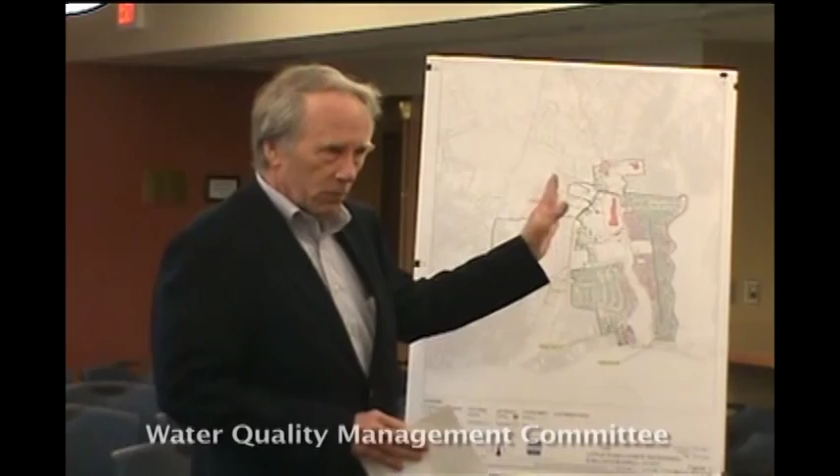Okay? It's not about the exact boundaries of an area to be sewered. The consultant's going to show you maps. The maps are a work in progress. Where the exact boundaries are is not a finished thing. So you can't look at this map and say, my house is in, my house is out. We don't know yet.

Third piece, it's not about effluent disposal sites. The septic is going to go to the plant in West Falmouth. That's a given. Where it goes after that is not a given. It's still a discussion matter. It's not a discussion matter for today.

Fourth, which I know is going to be in everybody's mind, who's paying for this and how much are they going to pay? That's not on the table today because we don't know. We don't have an idea. You're talking about a system that hasn't been designed. There's a whole bunch of pieces here that have to be settled before you can answer any of those questions.

If there's going to be betterments, how much they'd be, nobody can know until you know how much it costs and until the town makes decisions about where it's going to get the money, whether it's going to get a 0 interest loan or a 2% loan. These make huge differences to the cost of this thing. Nobody knows, so we can't talk about it at this point.

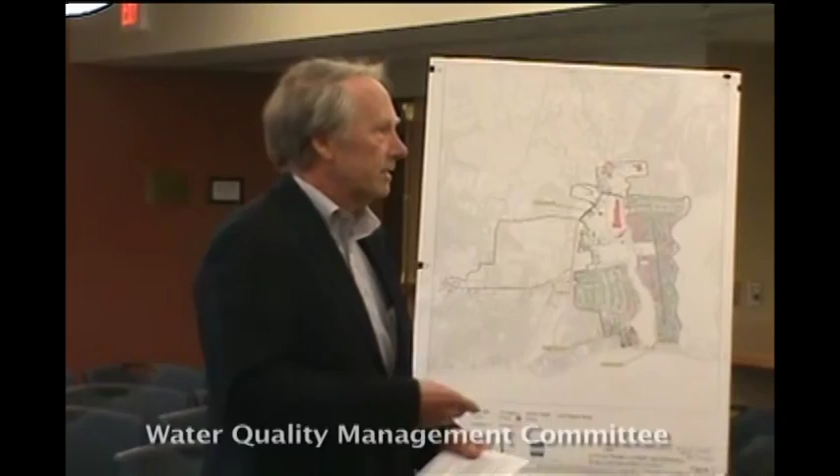What this meeting is about is this. The sewer world is a lot different than it was 30 years ago. Back then, the big pipes, 12 feet down in the ground, was the only option that anybody really considered. That's not the case anymore. There's other options, which we're going to talk about today, which are cheaper in many cases, less intrusive. I mean, they all have pluses and minuses. It is not all about big pipes anymore. We're here to explore all those options, and particularly how they would affect people who live in these neighborhoods.

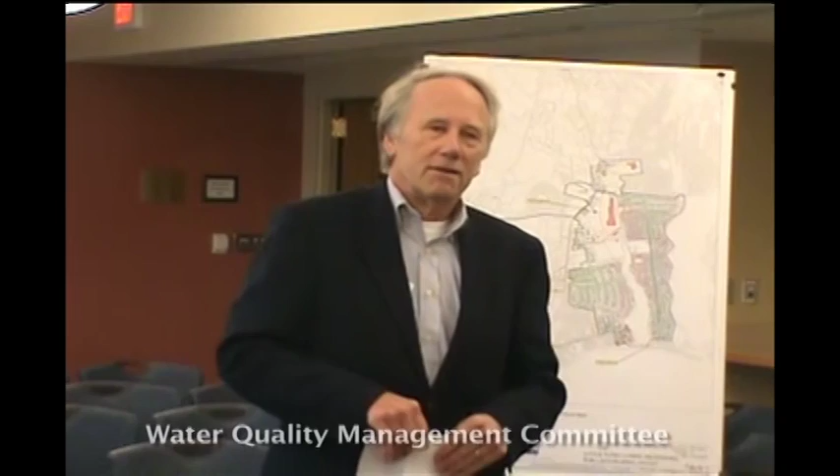So we've invited people from the Teaticket Association, from the Heights Maravista Association, Finance Committee. Judy's lived in the Heights all her life, and she's been on the Finance Committee or the staff of the Finance Committee almost all of her life.

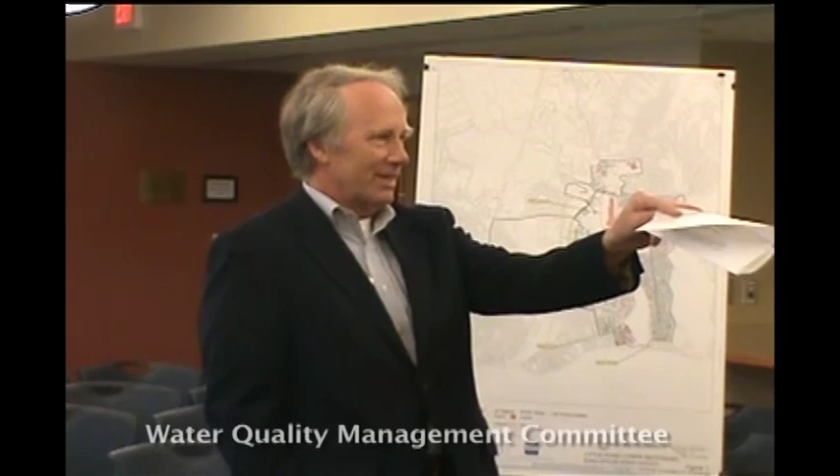You know, we got this guy who spent the last 3 years immersed in sewage, and he's back for more. These folks have lived in the Heights all their lives. You've lived there. We wanted to make sure you were here to get the picture, to think about it, and to give us your input. Because, you know, you're going to have to know about it. You're going to have to live with whatever the town ends up doing.

So the purpose is to explore these options today. No decisions are being made today. The consultant is here to tell you where their thinking has gone, to tell you what the options are, and to get your input. That's what it's all about. And you should introduce the consultant. Jeff, from GHD. They changed their name, I can't use it.

Good morning, everyone. My name is Jeff Gregg. I'm from GHD Inc., formerly Stearns & Wheler, for those that know both. What I'm going to do today is talk to you a little bit about the different technologies that we've been asked to look at for collection systems. I've got a handout, and I'll walk through the basics of the different types of collection systems, and then talk about what our task is for these various areas and some of the progress we've made to date.

As Eric indicated, we aren't finished. There are no decisions that have been made yet. We haven't done any of the costing or any of those things. It's really to use this forum to help educate the group, answer questions, and receive feedback on the various different technologies. And if there are questions that I can't answer today, I'll certainly have them documented, and we can work on trying to get back on those questions to see if we can address them. So what I wanted to do is start off.

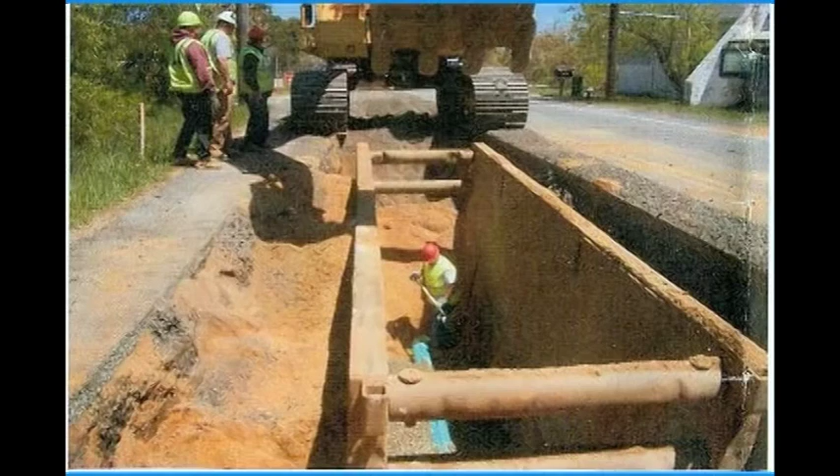Every town is different. Towns will have paving plans, and this applies to most of the technologies. If a town has a paving plan, they may just do a trench repair and come back to resurface the road afterwards. It all comes down to how they want to do it and what other projects they're doing.

Some towns elect to do water work at the same time, or there's underground utility work happening, like the gas company—in case you drive anywhere on the Cape, this past year the gas company was everywhere doing improvements. So a lot of times towns will try to piggyback that. It's very disruptive; all construction can be disruptive, but there are ways to work around it: communication, traffic management, informing the public so people know what to expect.

These pictures are very useful to look at the scale of how deep this pipe is. The pipe is blue down at the bottom, and you see a man well below ground level, and this large metal object around him is called a box. To do all the excavating, it has to be done within a box—you dig, then move the box, then dig, and so on. So it's slow and deep if the system is entirely by gravity.

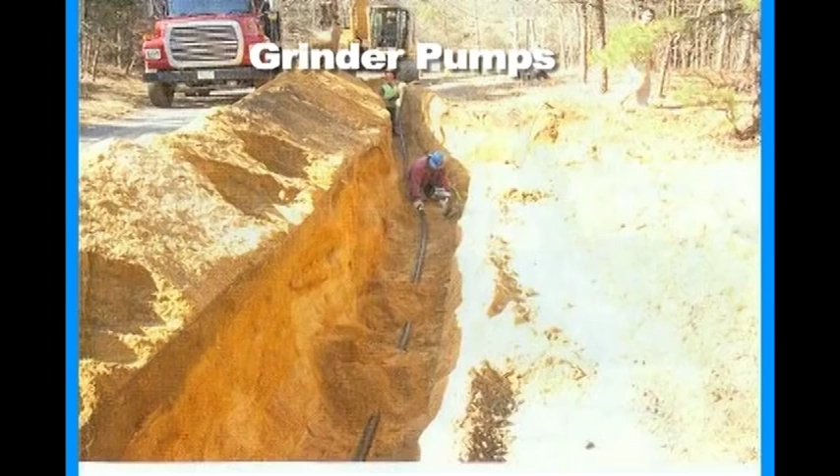To give you an idea, the picture below shows a typical trench. In this case it's high-density polyethylene pipe, kind of flexible, though you can also use PVC, which looks like a miniature version of gravity sewer pipe—just with thicker walls so it can handle pressure. Here it's fused together using a tool that heats up the pipes so they basically butt weld together.

This trench is about 4 feet deep, so they have about 4 feet of cover. Some towns may require it deeper. If you're in colder climates, there's a concern about freezing, so you typically want to get it below frost depth.

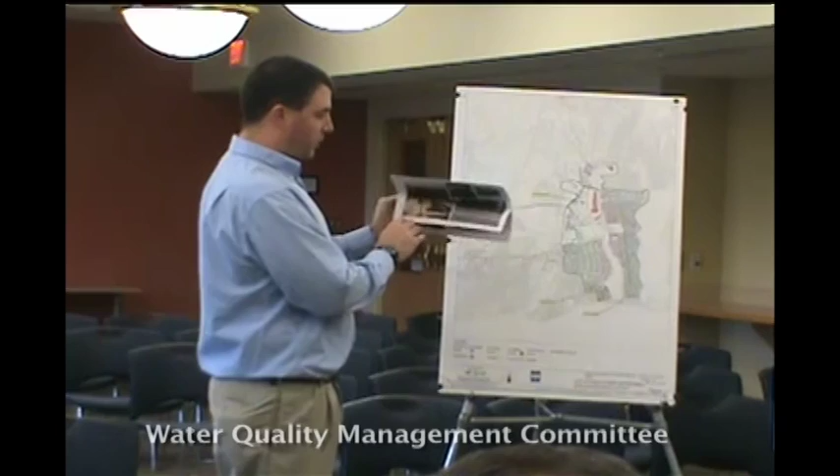As Virginia pointed out, in the gravity example you had a trench box. If your excavation exceeds 4.5 feet, you're going to have a trench box regardless of the pipe size—whether the pipe is this big or this big, if you're past that OSHA threshold, they'll have to put a box in, which makes your trench wider. It doesn't have to be as big a box since it's not as big a pipe, but it's still going to have a structure.

So there's safety considerations for that as well.

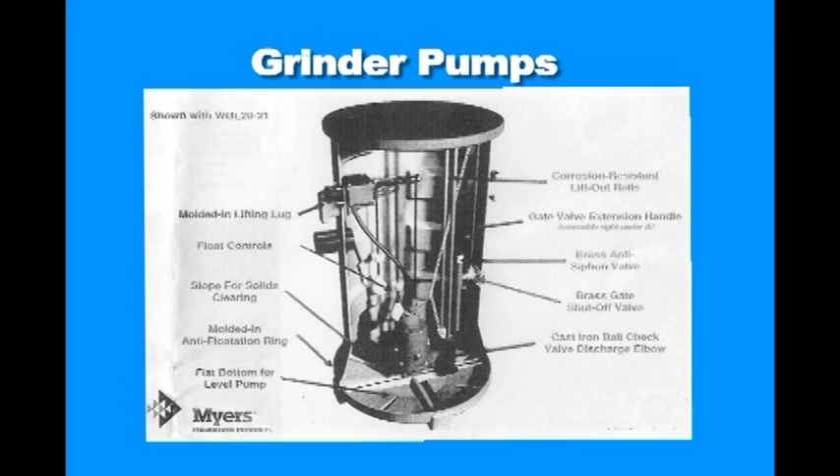There are others. The Myers is more like it's a slightly larger structure, so the cover is slightly larger, probably closer to 2.5 to 3 feet in diameter. But basically, a pump sits on the bottom of that structure. Your flow flows by gravity from your house, as it would to your septic system, but it would go to this structure, and then it would be pumped out to a small diameter.

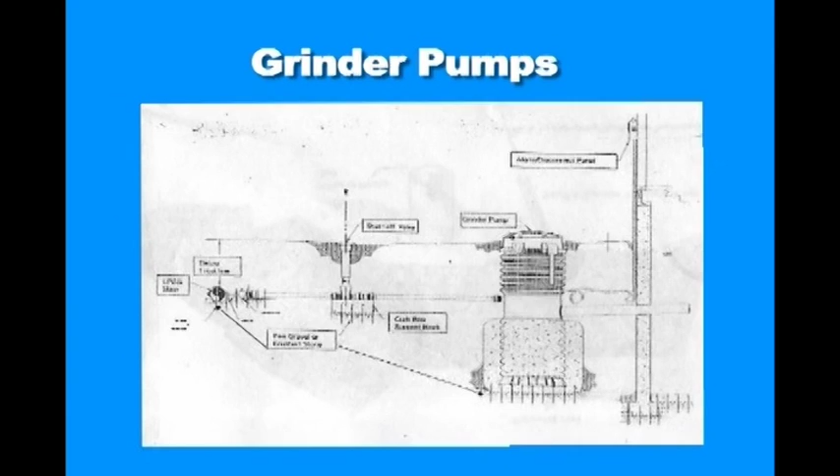To give you an example, the diagram in the lower right-hand corner shows how flow comes from your house into, this is the E-One example, a high-density polyethylene structure, and then it pumps it out, and you have a curb stop at the property line, and then it ties into the small diameter main. The small diameter main in the road is typically between 1.5 to 4 inches.

And if you had to pump further, then you have to get a larger main because you have to deal with head losses and velocities. These types of systems can either pump into their own system and eventually end up dumping into a gravity collection system, go directly to a pumping station, or go directly to the treatment plant. In this case, because the treatment plant is so far away, it's very unlikely that we'll look at that alternative. It will likely end up going to some of the existing collection system or other pumping stations proposed or existing to ultimately end up at the treatment plant.

The ones that we've had in Woods Hole have probably been there for 10 years, and as far as I know, they've been fairly trouble-free.

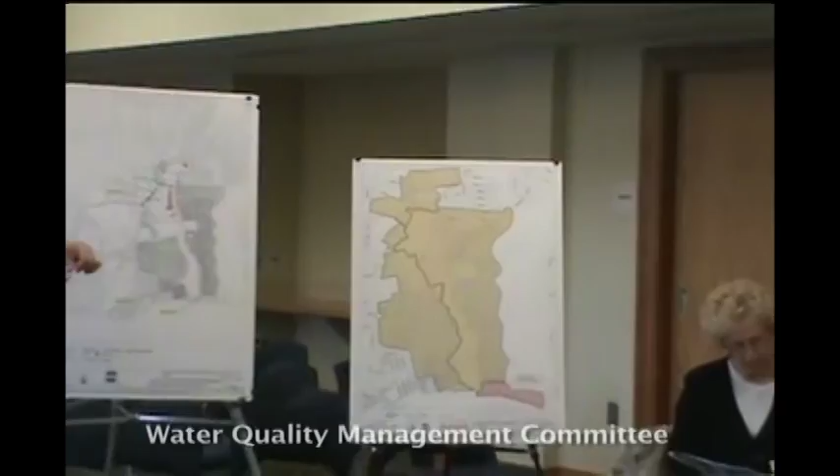So now this grinder pump system eliminates the need for the traditional septic. It doesn't work with it, it replaces it, correct? You can do two things. It typically replaces it. In the case of most people's septic systems, they've been in the ground for over 20 years, and the integrity of the tank is questionable, so depending on the age of the system, it's easier to go in and install this.

The E-Ones, they literally come in with a little thing that looks like a bobcat, basically with a big auger on the back of it, and they just auger it down, and they plop it in.

If it needs some kind of balance because you're in groundwater, or you think that you have the potential for groundwater coming up, they'll put a concrete footing around it to hold it in place, and then that would replace your septic tank, and then it would go out.

They do make these types of systems that can either go in your house, or into your septic system. Like if you had a brand new septic tank and it was easy to kind of go in for that piping, you could have that unit installed. They typically don't like to do that as much, because it may be more expensive since it's more of a specialty setup for them. You have to deal with making sure that you have it set up so that you can get the rails in, and you actually have to go into the structure to make sure that your pipe's coming out through that septic tank, through your effluent discharge location.

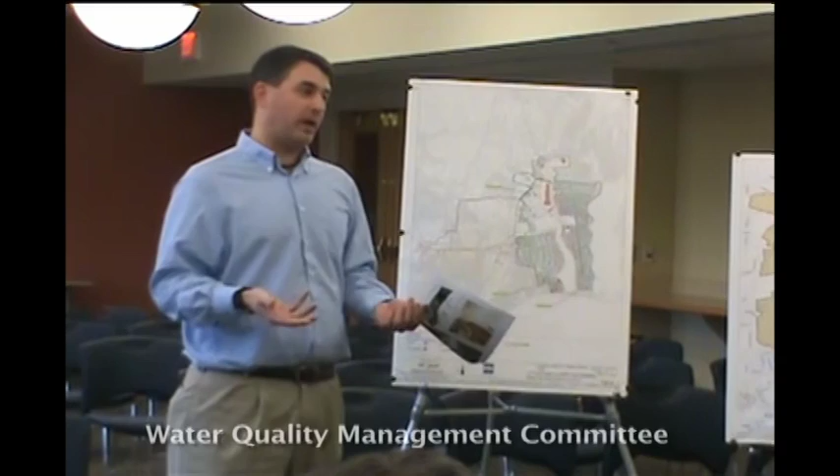What you could possibly do is, you may not be able to run the pumps, but you may be able to deal with the alarm panel, meaning so that you know, granted if you're in a hurricane you don't have any power, but at least you'll get an idea - better stop flushing the toilet right now, and call the DPW to see if they can come hook up the gen set and pump us out. I'm not sure if the Vineyard did it, but I think I know these two manufacturers, at least one of them, probably both.

You can get slightly larger tanks. There's a point where you might say the bigger the better, but it's not always the best. So that might be a decision later on, what size we standardize.

We asked both of these towns in the Vineyard, which have had them in place for, one has had them for 10 years, one's had them for maybe 7 or so. We asked them about frequency of repair - how many times did the town get called out to fix something in one of these? And in both cases, it was like once a year.

And it was usually because some kid had put a G.I. Joe down the toilet, or something major had gotten into the works that had made it need repair. But the number of repair calls were very, very low, considering they had hundreds of these installations that had been in place for quite a few years.

So that was reassuring, comforting, yeah.

As technology is advancing and you can access pretty much anything on your smartphone, they have relatively inexpensive instrumentation programs that would allow them to set up a network so that the town could see pump failure. Even in non-storm events, they could see pump failures and deal with preventative maintenance before it becomes an issue.

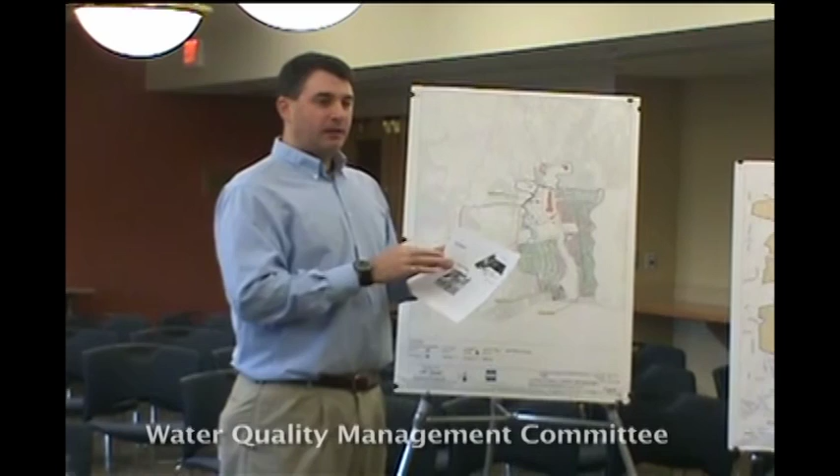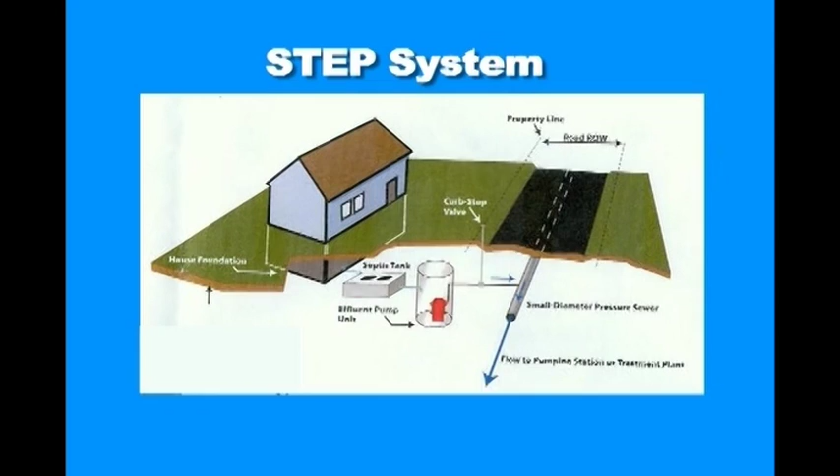So a STEP system works in a couple different ways. Essentially the STE part of it is the septic tank effluent part, and the P stands for pumping. In the diagram I have here, flow comes into a septic tank, then flows out of your septic tank into another pump chamber. So you're intercepting the flow before it gets to your leach field, and instead of going to your leach field, this would go to the main in the street.

So it'd be both liquids and solids flowing out of the tank? No, just liquid. The idea is septic tank effluent. In a septic tank the solids are collected at the bottom, for the same reason you don't want them going to your leaching field to clog that or your D-box. You want all that there, and then a septic hauler would periodically pump down that tank. So you would get mostly the clear liquid.

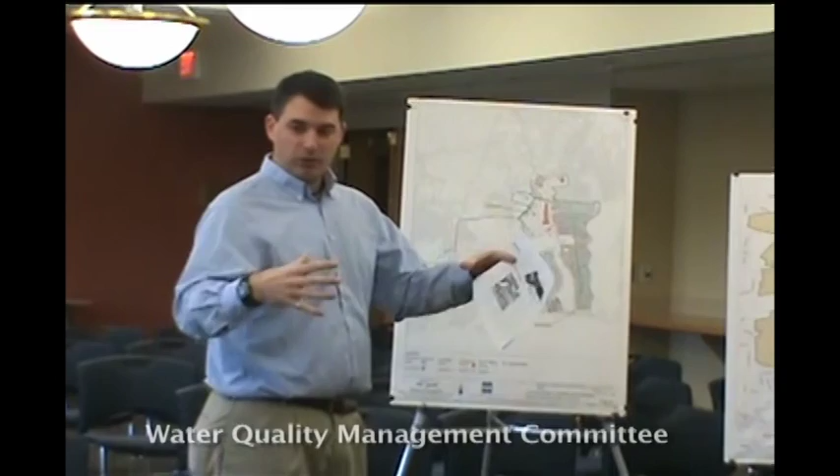Depending on the type of STEP system, you still have to be concerned about some solids carryover, and about oil and grease. It's a problem with all technologies. Some of these systems get retrofitted into your existing septic tank with a chamber that slides down. If your septic tank is older, it may have a smaller opening at the top. Do they have to make a modification to get it in? They can do that, and it creates a baffle so the solids stay at the bottom of the tank, and the clear effluent would be the liquid coming into your pumping chamber.

These systems are removing some of the solids, so you have to make sure the treatment facility receiving it has taken into consideration the design impacts, because the solids have nutrients and food that the biological system at the treatment plant may need. But it also avoids having solids settle out. You can go with slightly smaller pipes because you're pumping what is considered a clearer liquid in the world of wastewater.

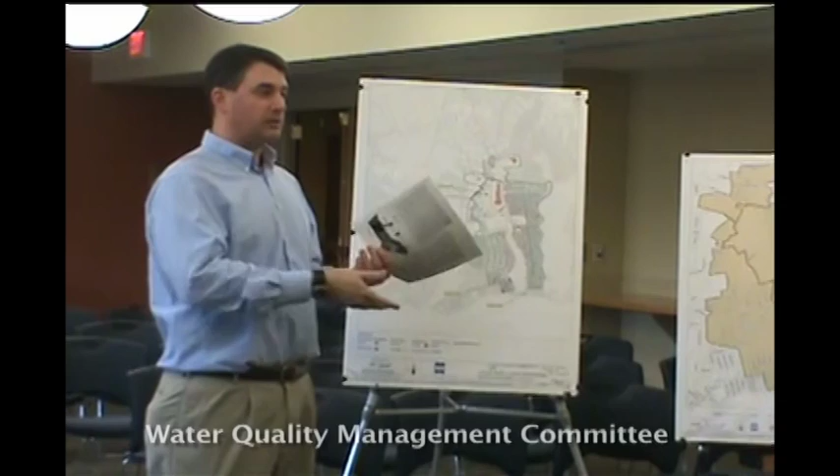I mean, this could be a small percentage of your total process, but the concern is, as you remove the solids here, they do need to be treated at some point somewhere, and septage is harder to treat at a treatment plant than wastewater, because you've now separated out the two things. And with wastewater that doesn't have all that solids, you may find that you're adding more carbon at your treatment plant to do the biological process to remove the nitrogen, because you have a very high nitrogen waste.

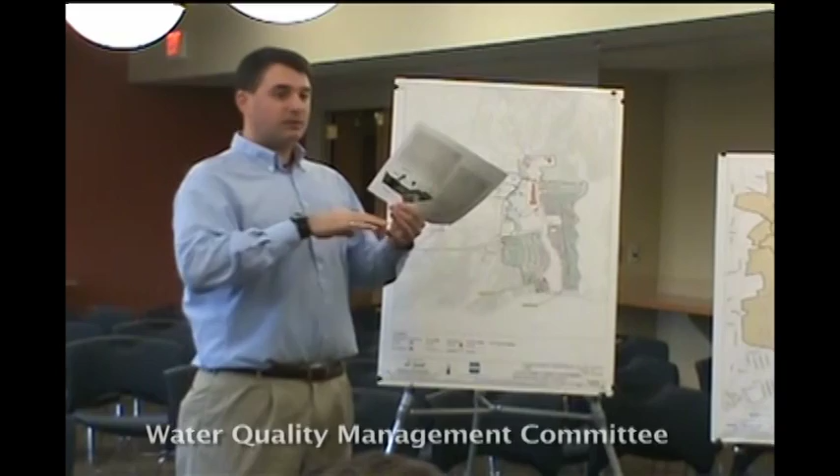That's not to say that, again, it depends on how your overall system is and how it's combined with other things, but those are impacts with those things. So there are pros and cons to both. And that problem is still true even if the septic haulers who pump the tanks take what they get out to the same plant. Because what happens is when you take it to the plant, you're putting it in a different part of the process, and septage is harder to manage.

When they pump in septage, they typically get it in, they'll store it, and then they bleed it into your system. Right. As opposed to just dumping it right in the headworks. Because it's like a shock load. Well, they can put it in wherever it's best. Yeah, well, they choose where they put it in. Well, they're not gonna put it in the worst place. No, but it depends, again, on your system, your treatment plant.

Our treatment plant has limited options for equalization. This is not necessarily a huge problem, but there's no doubt if this option was chosen, we'd have additional tankage design or equalization design at the treatment plant. I think we'd have to get with the designers to make sure this gets blended in better so we don't violate the permit. It's not as easy.

This is, let's say, the whole peninsula. Let's say it's 200,000 gallons. Current flow is 400 to 500,000. That's half or more of the current flow. There will be process changes that have to be significantly looked at to take this much septic tank effluent flow. The septic is no different than what we have now.

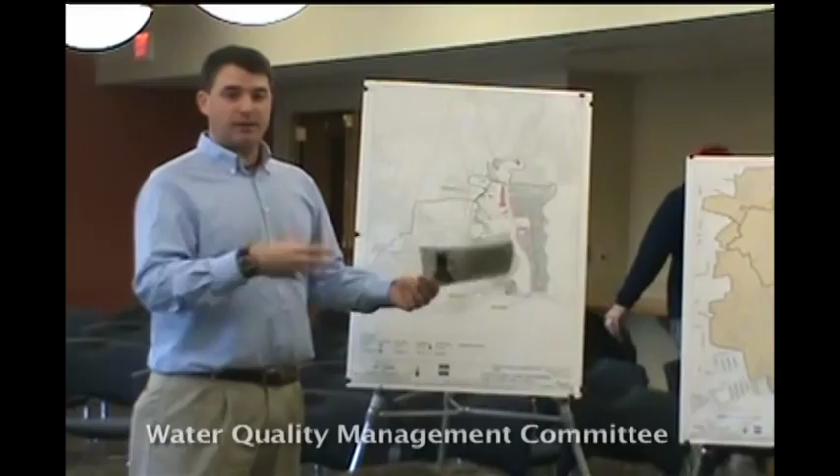Yeah, I think what it comes down to is what you may experience with a septic tank. If you have a septic tank effluent type system, it's very likely that the town, if they take on the management of the pumps, is going to take on the management of pumping that system. And so that septage, which could normally go wherever the septic hauler would take it, may be mandated to go to your treatment plant, so you know how it's being dealt with. You may elect to say septic haulers can take it wherever they feel it needs to be processed. But septage is more difficult to manage at a treatment plant than just raw wastewater.

I'm just looking at the fine print. Yep. It's hard to read here, where it says it's left in there for passive natural treatment.

So basically, it's passive natural treatment, so it means that it has time to break down. It doesn't mean you eliminate all the issues with it, but this is saying that there is some treatment that happens on site without the need for the plant to do all of it. But what you pay for, Ron, is that at the plant you then have to add the carbon that's breaking down in the septic tank to get it to denitrify. I'm just saying what it says here. Yeah, but it's what it says.

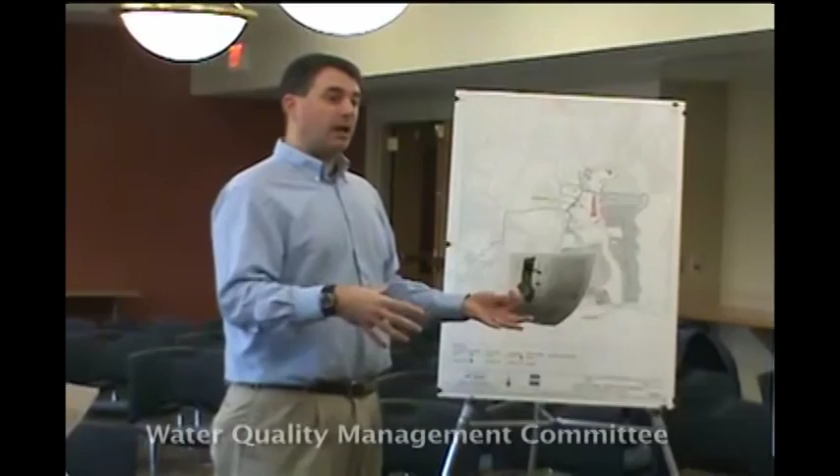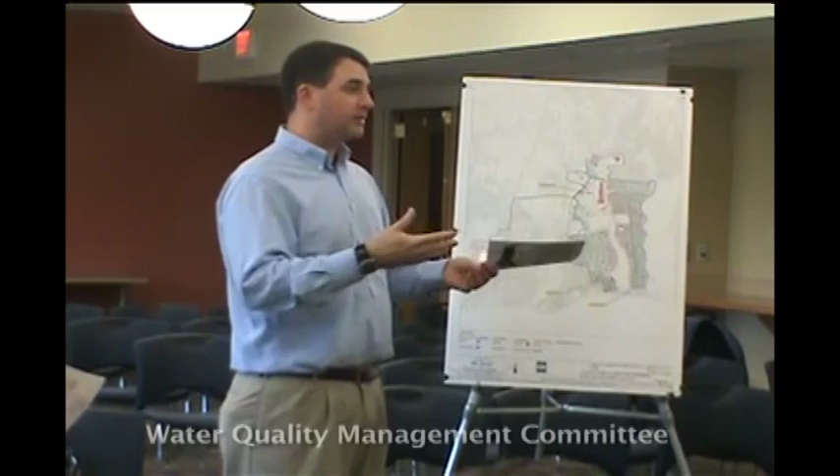And I guess on the flip side of the breakdown of that material, which isn't bad, is then you're left with a lot of inert material that you have to manage as basically a sludge. So there's a trade-off there as well. And again, I'm not saying it's any of these things. I'm just trying to talk about all the different technologies today. I think one question is that we now truck a lot of sludge off-take from the plant. So I guess it'd be a trade-off you'd have to look at in terms of how much less or more sludge would be done through the passive process. These are all just questions.

There's one basic assumption being made here, and that is that the septic tank will serve this system, that the septic tank is tight and new enough, and we are dealing with an area that has been developed for a very long time. So one of the things the committee is doing is looking at the Board of Health records to get a sense of how many of these systems are really old, and how many are actually Title V and would fit into this category. That research is being done now, and until we get a handle on the relative percentage of old systems and new systems, that's just another variable that needs to be looked at as we narrow down to the best system for Maravista and Falmouth Heights.

Right. A lot of these places may still have cesspools, as you well know. And if that's the case, this would be completely out the window. Well, to clarify, it wouldn't be out the window, it just means you'd be installing a new tank. You'd be putting in a tank, but it'd be a manufactured tank with the pump unit already in it. They're designed for that, similar to the canned unit for a grinder pump, just a bigger canned unit, and they'd install that. And they wouldn't have to put a leach field in. No, all of this is a collection system, so I just used the leach field as an example of what you have now, or what you may have.

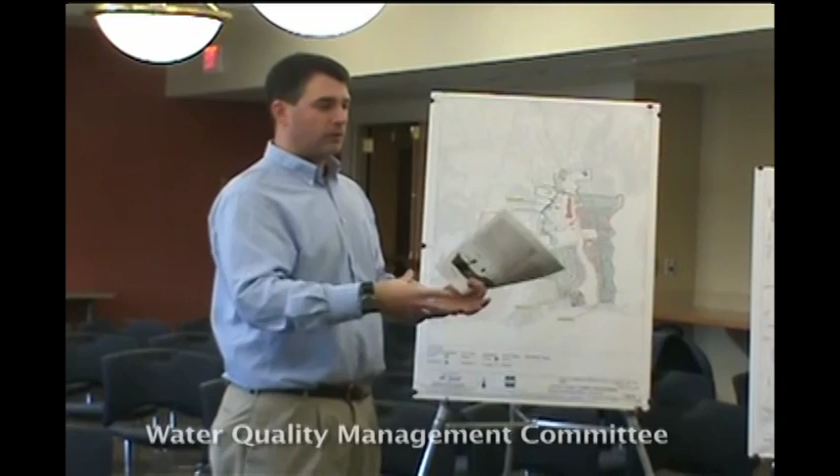Most systems, if it's a Title V system, flow from your house to a septic tank, and then from your septic tank to a leaching facility. Now, there are a lot of cesspools, so you may have it flow from your house into a cesspool that goes into an overflow cesspool. That's basically just a big round concrete tank, or maybe made out of block, and it's basically just a way to try to get that into the ground.

You know, I always read what vendors say with skepticism. The septic tank in this picture is the same as the septic tank in your home, so you get the same passive removal as you would with the septic tank. So there's no difference. There is a difference because of solids carry-over, where you could clog your soil absorption system. This says 10 to 12 years; I think they're pushing the envelope. You don't want solids flowing over into your leach field, and we don't want solids flowing into the pump system. Whether it's 10 years or 5 years, I don't know. So there are some similarities, but every vendor, I don't care who, puts it in the best light possible.

A variation on the STEP system is the STEG system, which is septic tank effluent gravity. The septic tank effluent gravity system would basically apply if your house was located in an area where you could have flow through into your septic tank and then into a gravity system in the street.

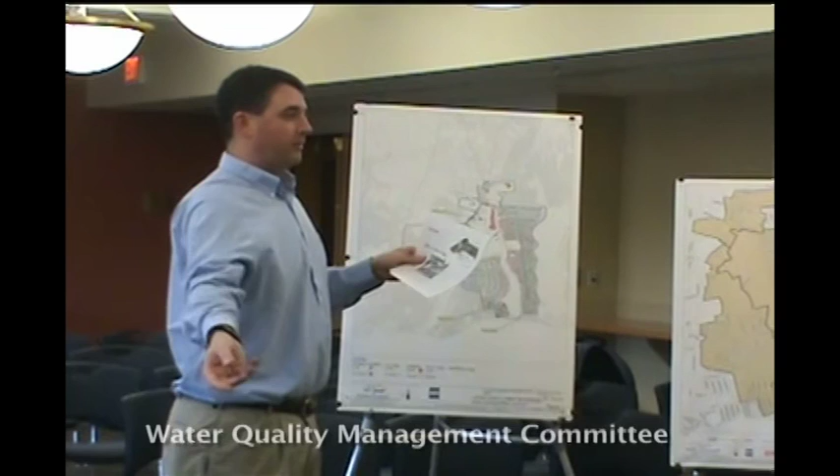They do talk about the ability to flow a septic tank effluent gravity system into a septic tank effluent pump system, and this is where I'd be very cautious. But you're asking for a lot of design considerations to make sure that house is high enough that when those other pumps kick on, they're not pumping the other way.

So, coming back to you - when we talk about septic tank effluent gravity systems, we're talking about them as an alternative to a gravity system. You'd have potentially a smaller main in the street, but you have to be able to get from your septic tank to the street.

The disadvantage of a septic tank effluent gravity system is that if your septic tank's in the back and the sewer's in the front, you've got to get it around your house by gravity out to the street. And you still have the same issue if you had a cesspool - you'd need to put in a septic tank to do that. They're all possibilities.

It's very similar to the septic tank pumping system. The advantages aren't as great because even if it's a small diameter pipe, a 2 or 4 inch pipe located 12 feet in the ground isn't that much cheaper than an 8 inch pipe at that same depth, because you've got to get down there either way.

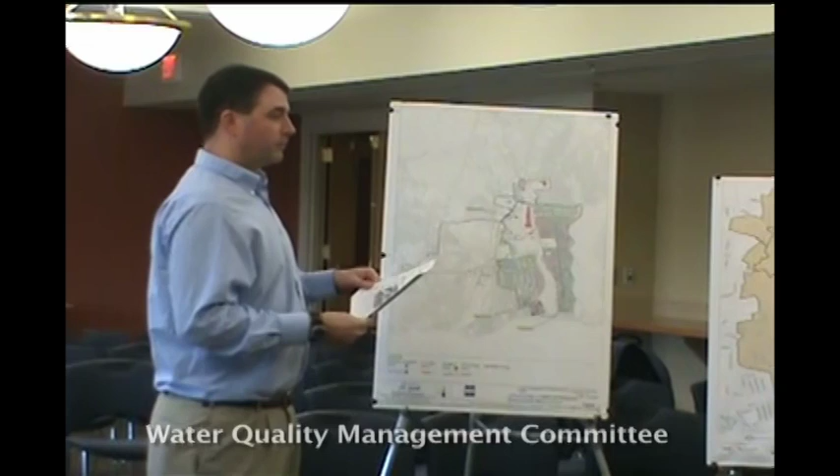It's really the STEP system that gives you more advantages because you are pumping, but you're adding an electrical system to the process.

Is there a need for uniformity? If some houses under Title V could use a STEP system, and for another it was more feasible to use a grinder pump - it's very possible, and that comes into the design considerations.

What it comes down to is the pumps. Some pumps - the biggest difference between an E/One system and a Myers system with grinder pumps - is one's a positive displacement pump and one is a centrifugal pump. I know everybody understands that... well, that's why I'm going to explain.

In very general terms, a positive displacement pump will pump at a fairly constant rate, and it doesn't care what the head pressure is - the friction and head loss you have to pump against. A Myers pump is a centrifugal pump, so it can pump at a variable range of flows, but those are impacted by head losses in your system.

So when you design your system, all those things come into consideration. Your pipes will get larger as you're trying to deal with pumping further away or higher flows, to make sure you're maintaining velocities in your system. They're all design considerations.

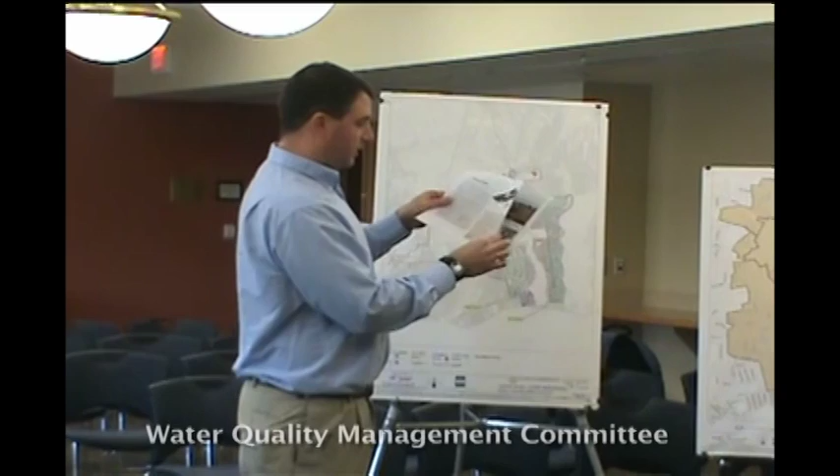You don't have the first page to show you from a lateral, but the ones in the main are the same idea. Flow will come down at an angle to a bend, and then it can get pulled up vertically, and then it flows down to the next bend, and then it gets pulled up in the system. But there are limits—you can't just put 8 gazillion bends in there and think you're gonna pull it all the way up, because you're limited by friction losses in the system and the amount of vacuum that you're pulling in the system.

Once it gets in the main, it's essentially a gravity pipe, and the idea is that you don't have to necessarily go as deep, because you can put in lifts, which are these bends, and you can get yourself back up closer to the ground surface.

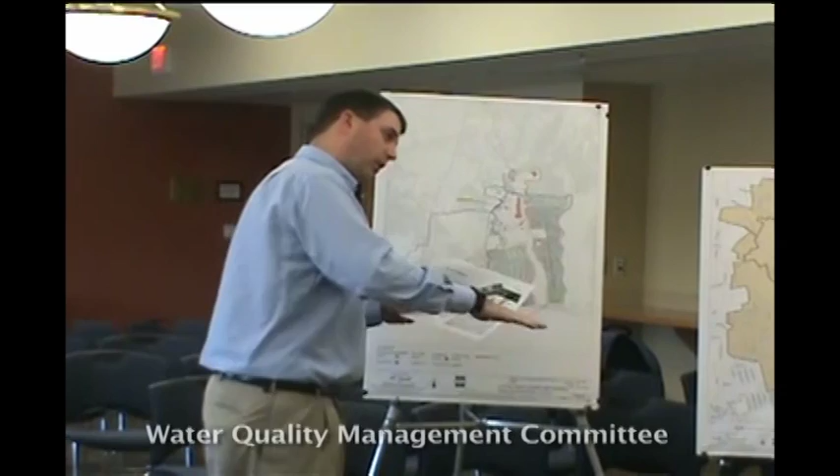The disadvantage, as I said, is that all comes at a cost. Some of the advantages are, if you know where utilities are, you can use these to get below the utility and then come up and gain some grade.

One of the things that nobody ever talks about with collection systems is there are other utilities in the ground. Everyone likes to think, oh, we can put this in and go down four feet and just sail along and be done in no time. But you've got all your water mains, your water services, a mishmash of electrical and gas and telephone and cable, and depending on where you are and what the neighborhood is, there are all these other utilities. It's usually first come, first served, and sewer is usually the last guy on the street, so that's why sewer ends up going deeper.

So even on some of these smaller pipe diameter type systems, you still have to get below water, and you have to get deep enough so you're avoiding freezing and things like that. So there are considerations to that.

The vacuum system has the advantage, like a gravity system, that there's no power required at the site.

There is pumping involved in all of these, because of where we are, all of these technologies will require some sort of pumping station somewhere to pick up flow and get it into the system, because not everything will be able to connect directly into the existing collection system for various reasons.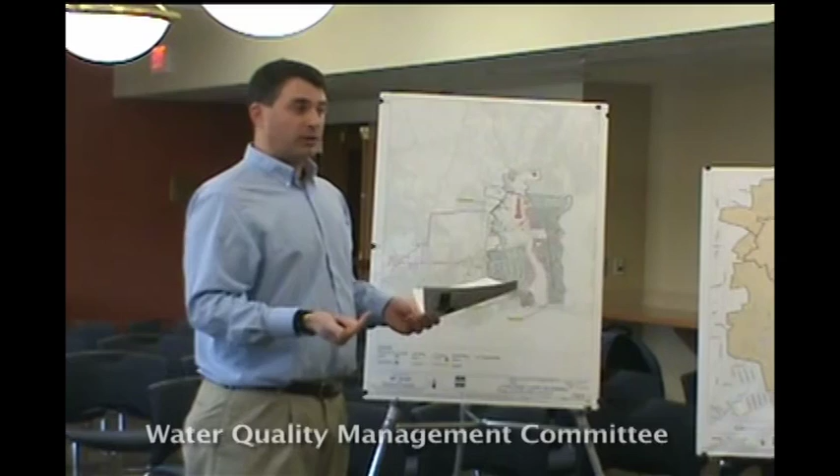The valve pit does not have to be located on private property. The town of Barnstable, and I know because I designed the system, elected to put all their valve pits in the road right-of-way. That meant they had the valve pit in the right-of-way, and then a vent pipe, which used to look like a candy cane, similar to what you might see on septic systems. Now they have a prettier looking box. Basically, there's a way they need to introduce air into the system prior to the valve so you don't collapse your valve pit. You can have all those along the street line, or have the valve pit closer to the house, with the vent even closer, depending on where it's going to be on your property. But you are required to have a vent.

The structure looks like a manhole cover, so you'd have a manhole cover in your yard. It could be flush with grade so you can mow over it and things like that.

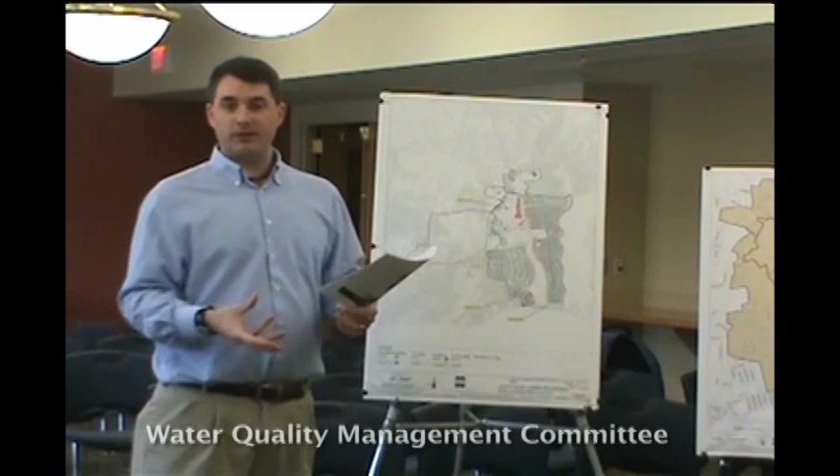The disadvantage of a vacuum type system is you're building a pumping station that's slightly larger than most conventional pumping stations, because you've got to have a receiving tank, which I think I have pictures of, and later on I'll show you the station. There's a receiving tank and other appurtenances, but you need more pumps because you have vacuums, and then you have to have a discharge pump that's pumping it somewhere.

I think there was one more point, and that is, as you said, this is the advantage of the electrical side of things at the house, but what we understand is that if you're in a community like ours, and there happens to be a bunch of houses at the end of the line on the sewer, with none in between because it's seasonal, then it doesn't work very well. You need a consistent thing, you need people all the way along to make it operate. So that's another factor particularly related to our situation.

What the system does is rely on all the other valves to pull air into the system, because that little slug of air is basically acting as a plunger that helps push your flow, while you're pulling it with your vacuum. We've seen this in a number of different communities - if you have a flow at the end, or a larger flow at the end of the system, you can overwhelm it if you don't have enough smaller contributors along the way to help shuttle it along.

Every time the valve opens, it sucks out the wastewater instantly, pulls in a puff of air right behind it, and then closes. It's open for a very short time. It has no issue sucking up pretty much anything - it's pretty impressive. It's a fast, quick action.

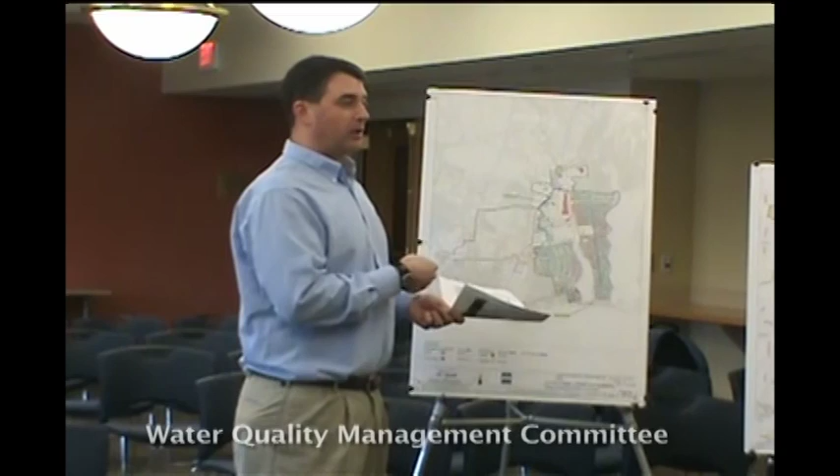These systems also don't typically fail in the closed position. So barring storm events or anything like that, if your system had a problem, what will actually happen is the valve will stay open, so it'll just continue to suck. Then at the station, wherever that is, they would see a loss in vacuum pressure, and they'd go, okay, now we've got to find which valve is open. They have a process to go through to find that open valve.

The committee actually went to Barnstable and looked at this installation that they put in. I think it's fair to say they weren't recommending it.

And we didn't go to Provincetown, but we know they're not recommending it either, because they actually had a failure there during the 4th of July weekend a couple of years ago, when they couldn't get a repair person in a timely way, and everything backed up into everybody's house and business on the 4th of July weekend. So it has some real deficiencies. And in Barnstable, at the end of the day, it didn't save them much money, according to the operators. So they weren't recommending it.

The bigger difference with Barnstable, I'd like to clarify, is that they elected to put it into a very commercial area, so they had some very large flows at the very extremities of the system, and that added to some of the issues they had. They also had a very steep learning curve. So it's like 10 years later, and now they deal with it like they deal with all their other stations. But in the first couple of years, they were spending more time just because they had to learn the system, and your installers have to learn how to install the system because it's particular. You can't have any leaks or the system will not work.

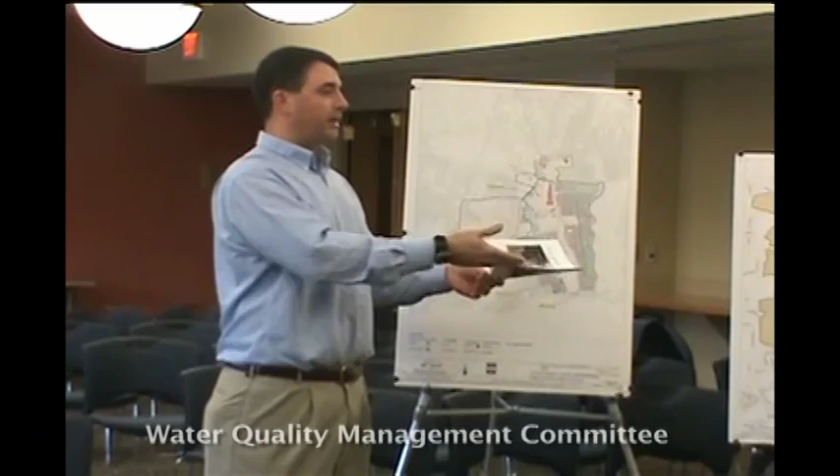I don't know if anyone collects that nationwide. There is a lot of data out there from installations in place that talk about electricity use and things like that. The difficulty is that you can get a broad perspective, but every system truly is unique, because this person may have this fancy SCADA system that allows them to respond in a certain way, and this one may be a small community that has to deal with it a different way, and their costs are different. And these guys may be contract operators, these are town employees.

So there are other things that get into how that operation and maintenance cost is developed. So when we talk about costs, we're going to try to build off of the information we have available on these different types of systems, and local experience with regards to what the cost is, what they charge, what their responses are. Some of the things we have to rely on the manufacturer as well, because they maintain some of these systems. There are towns that have service contracts with the pump system manufacturers or their suppliers, who come out and maintain that equipment. So you could have an arrangement with a company that deals with technology A, and when you have failures, you say, you know, we have a service contract, we need you to come out and service that piece of equipment, and then it's however you negotiate that contract with them. So that's why I think there isn't one nationwide version of how they maintain that cost.

If you think about a vacuum system and something goes wrong with it, you basically get a fault that ripples over almost all the people connected to that vacuum system. Each person dependent upon that to clear out is going to sense that fault. If you have a sewer going to a pump station and there's a fault at the pump station, usually the lowest connected homes will see the problem first—not everybody, but one or two homes. This is just how it goes.

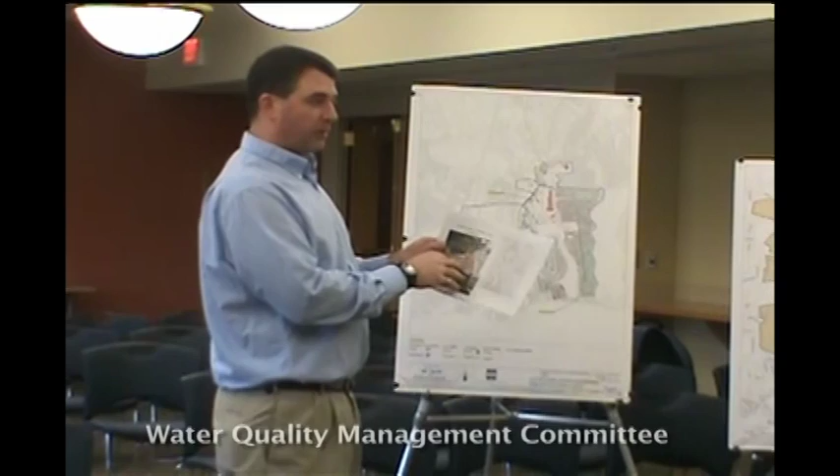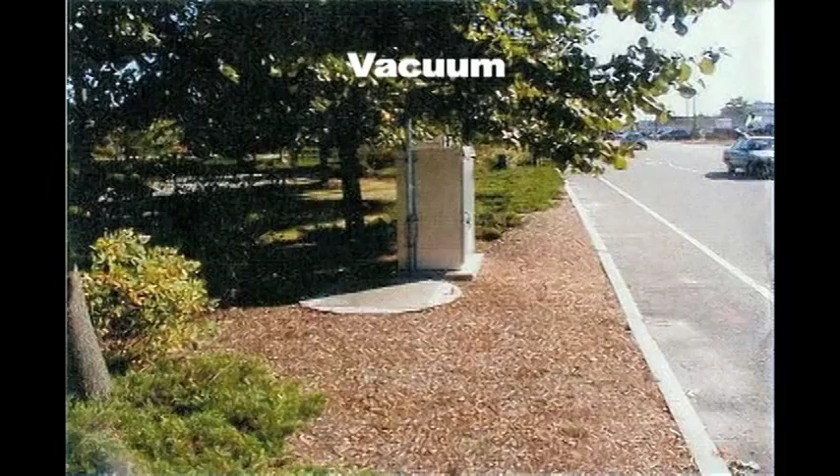Just to finish up on vacuum systems: if you have a larger flow, you typically go to what's called a buffer tank, which would be for commercial or a larger user. This gives an example of what that might look like—flow comes into basically a manhole with 10-gallon sumps at the bottom, then it flows up. This layout looks very similar to the New Silver Beach setup on the surface, with a concrete structure, a hatch, and a panel.

Would we expect this for motels and inns? Yes, not for individual homes—the mall, for example, would have that. That'd be a large enough user that instead of building a bunch of little vacuum pits to deal with it, you could have it all flow by gravity to a point, and then a buffer tank acts like a vacuum pumping station—just a larger area to receive flow.

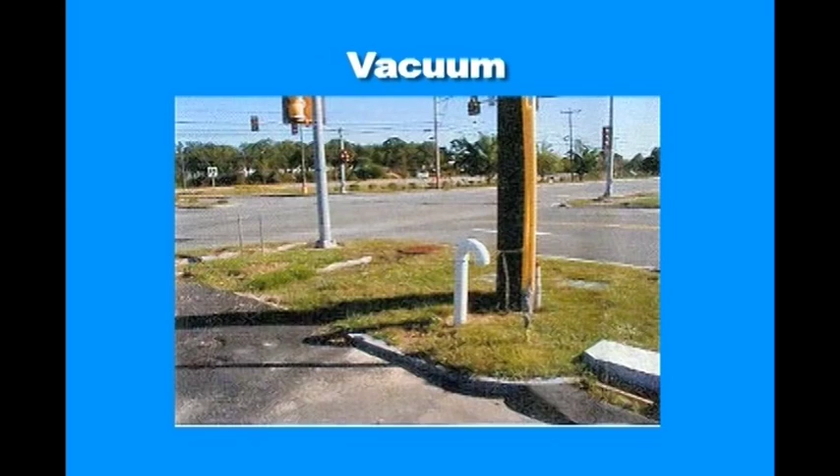And then you can see an example of a candy cane. They now have a little box that comes up to provide cover there, or to make it look a little less hygienish.

So what I'd like to do now is walk through some examples of the various different types of stations associated with these technologies. On the next page it says Falmouth station types—this gives an example of what you already have in town.

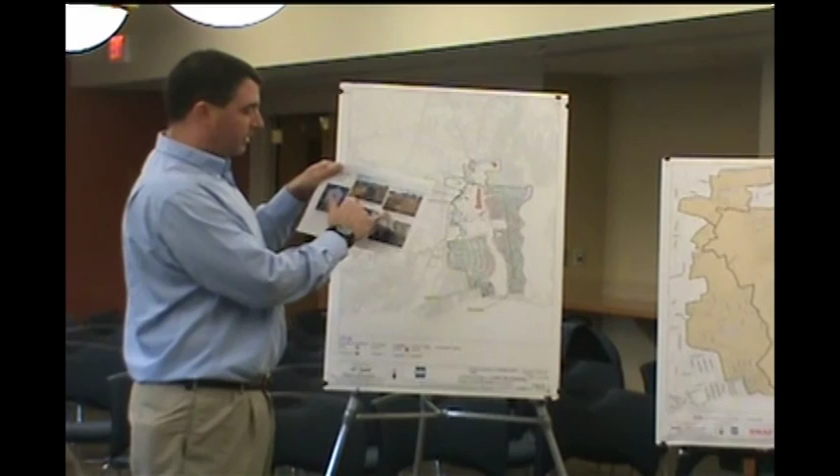It's a more traditional, what they call a wet pit, dry pit, which means it has a wet well where the wastewater comes in. It's got certain hazards and classifications associated with it because that's where the wastewater comes in, and then you have the main building, the dry well, which is where the pumps are, your generator, controls, and all that kind of stuff, and it looks more like a structure.

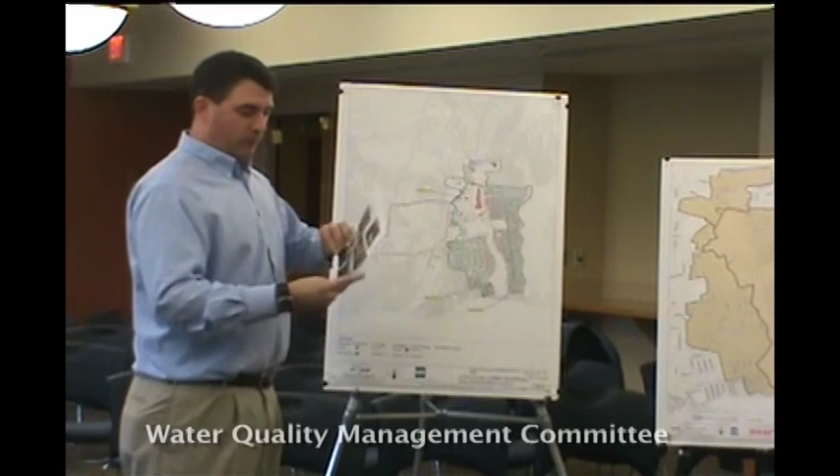One of the technologies that I don't believe Falmouth has, but may... Right here, sure, for a second. Sorry to interrupt you. No, sorry.

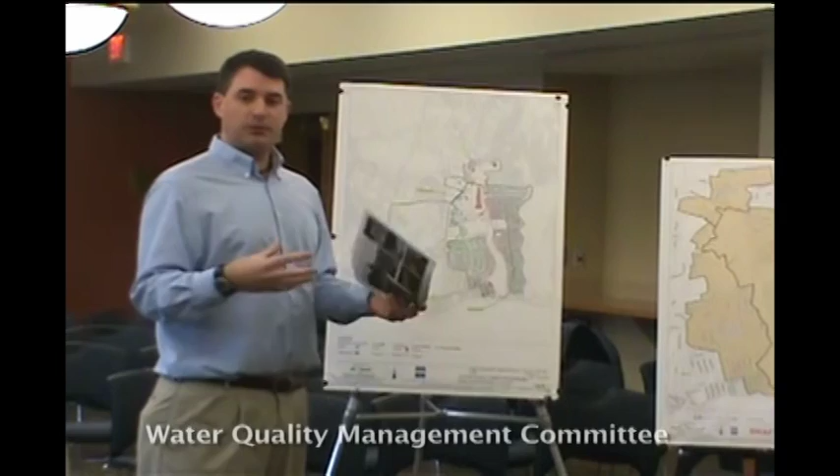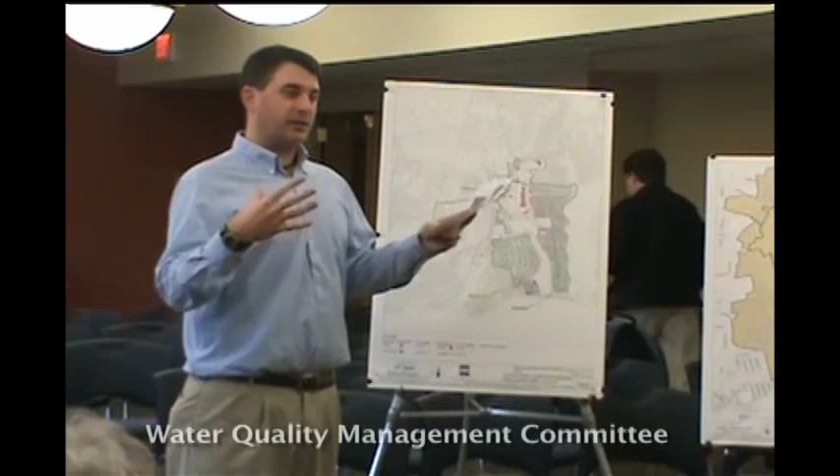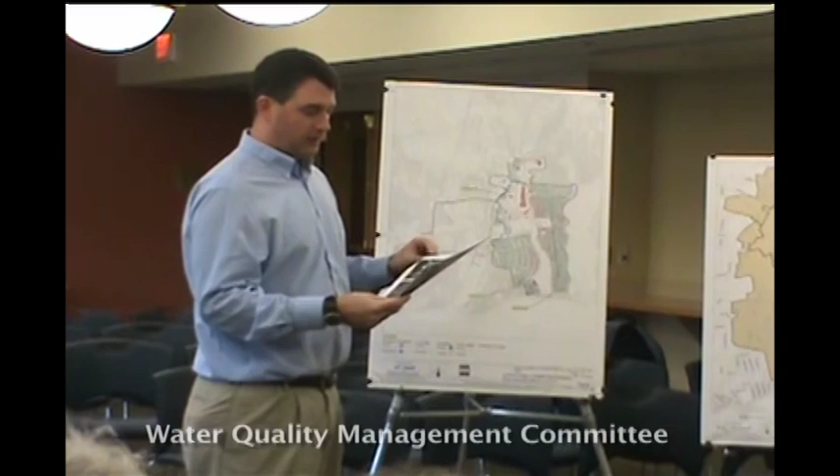And so you can have them set up in little fiberglass enclosures, like the pictures on the upper left and in the middle. You can have them in a little Cape Cod house, like you see on the lower left-hand side, or on the far right-hand side. You put fences in front of them, you can do all kinds of different things, but that's a suction lift type station. And that's for the vacuum system?

No, we've actually now jumped back; this would be for any type of system besides the vacuum. So if you had any kind of system that has to pump to a pumping station to get it up to your treatment plant or into your collection system somewhere else, you could have one of these types of systems. I see, some push, some pull. Correct. Okay. But the vacuum station is its own beast. So what it has, and if we jump to vacuum stations...

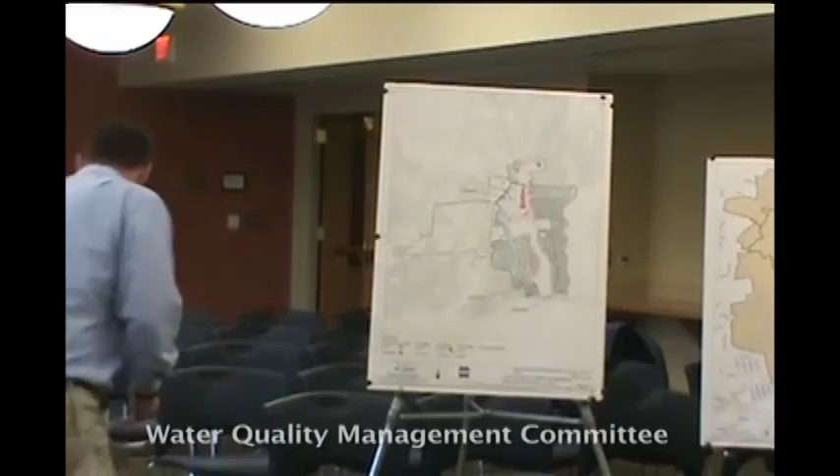I just want to jump in here. Oh, yeah, sorry. That's all right. Just to try to clarify this, on a number of the earlier pictures I showed you from the town, they're what's called submersible pumps. The pump is down in the liquid, and when the float signal tells it to come on, it comes on, okay?

With the suction lift, the pump actually sits up out of the liquid, and there's a little way to prime the pump. If you've ever had a pump you've got to prime to get it going, the suction lift pumps have to be primed to get going. They've got a little vacuum pump that will pull it up to the pump before it starts. So oftentimes it becomes a decision at the operation or maintenance level. Do you want to have to pull the pump out when it messes up, clean it off and fix it? Or do you want to maintain this vacuum pump along with the pump, where it's up above?

But on a suction lift type station, you do have a limit to how high you can go. Correct. You can only pick up what the atmospheric pressure above you is. So if you've got to pick up more than 23 or 25 feet, you're pushing it; you can't use a suction lift station. But it's basically an operator's type decision, I think, about what do you want to own and maintain.

We're back to try not to mix and match. Well, the other thing is that may be confusing. The town's already got a couple of submersible pump stations, so we may already have started down a path there. I don't know, Jerry. I don't know either. Okay. Just one little thing in case some people are confused by it.

We've made the transition now from talking about hardware at individual houses to the main system, the neighborhood or the town level. Correct. Sorry, I should have been clear. And I think the main point is that obviously there will be these pump stations in some locations. So what might they look like? Would they be completely underground? Would they look like this little shed here?

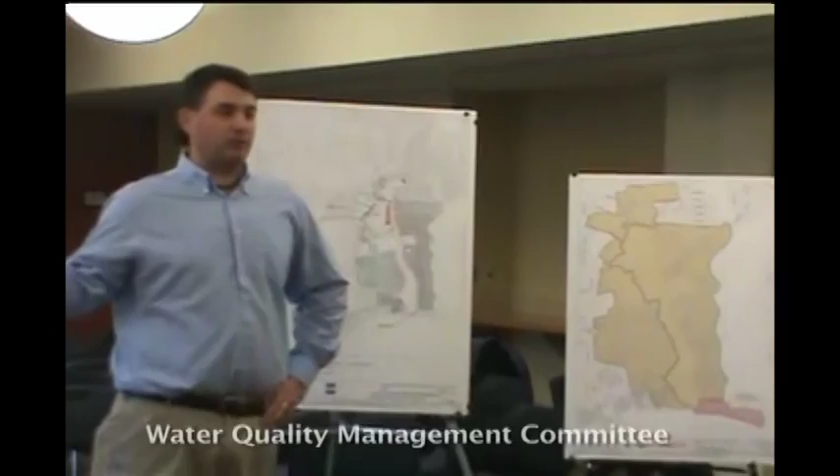Are the submersible ones less likely to have odor? No, it's not a function of the pumping technology type. Okay. It's a function of the wet well: flow coming into the wet well, how long it sits in the wet well, where it's coming from, how long it's been in the system before it's gotten to the wet well. Those are the issues. Okay, thanks. So those are some examples of suction lift types.

Now, the vacuum sewer system, if you look at the bottom three pictures, this is Barnstable and Provincetown. The far left is Provincetown. You can see all these guys jammed into this room. There's a tank in this bunker below ground, and all their pumps, both vacuum and wastewater pumps, are upstairs to suck it in from their collection system and pump it up to their treatment plant.

The disadvantage of this kind of configuration is, God forbid you ever had to do anything with the tank, you're basically taking the whole building down. And the building itself is their public restroom. So they built it in and did a nice job, and it's right downtown, and if you didn't know, you wouldn't know. You do expect some odor. Yeah, exactly. It's a nice way to camouflage it.

Then in the middle picture you can see where all the pumps are set up, and that's basically the first floor. So you're walking in, and below that is this tank room. In the Barnstable facility, theirs is on their treatment plant site. It's certainly a more industrial looking building, and it's got odor control.

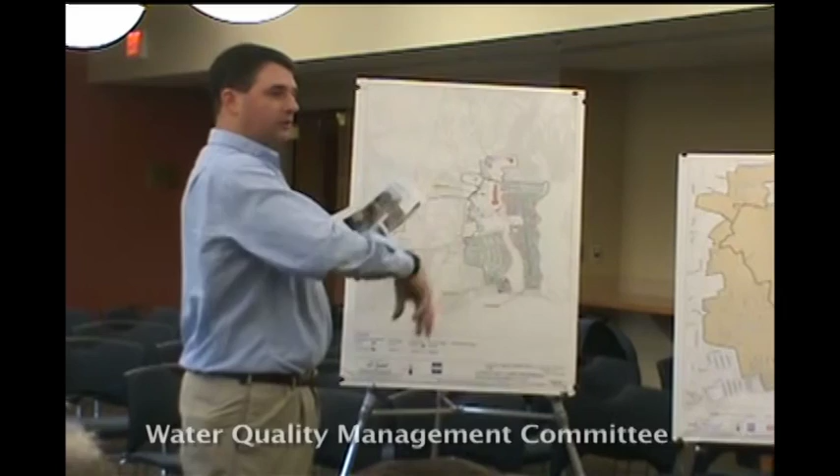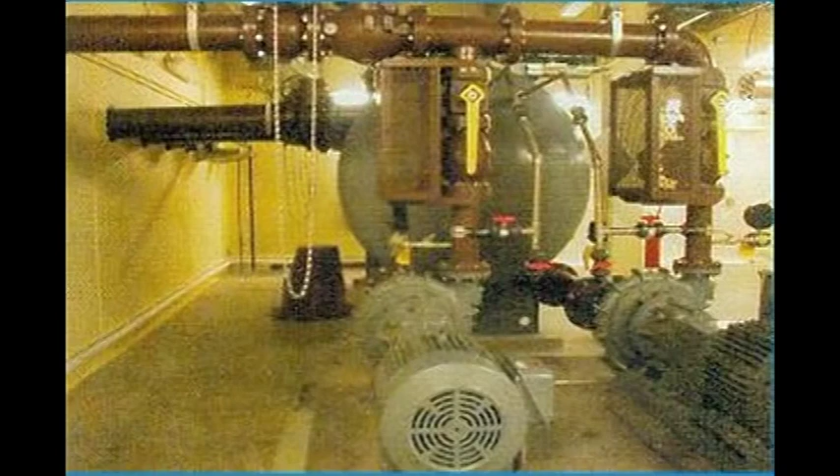Vacuum systems have to have odor control because you're pulling air from your collection systems, all that air from the whole system, and you're pumping it through the building, so you've got to run it through some kind of odor control. And in that case, they wanted to be able to expand the system, there's another tank they wanted to be able to put in, so that's why they have large doors, which you can't really see here; that's a separate picture.

But you can open up, you can actually monorail in another tank, and then they can pipe that all in and set that up. And so, again, it's just sort of like a big industrial building. I'm not really sure how else to explain it, but so that's like a vacuum sewer.

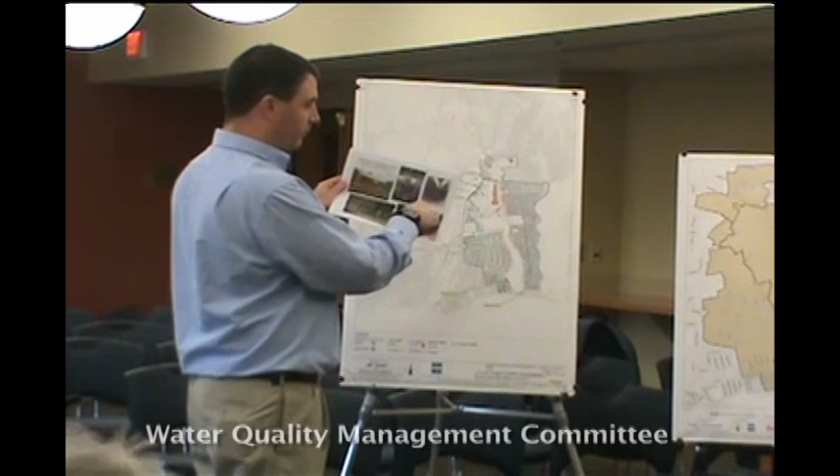And then on the back are some examples of submersible and wet pit dry pit stations. So we talked about submersibles before, and on the far right-hand side, you can see a shot looking down. You can see the pumps are at the bottom. There's a rail system to allow the operators to pull the pumps out. The biggest complaint we get from operators is, man, it's a pain to pull those suckers out sometimes if you're not set up properly, because sometimes they torque, or they don't get it lined up quite right.

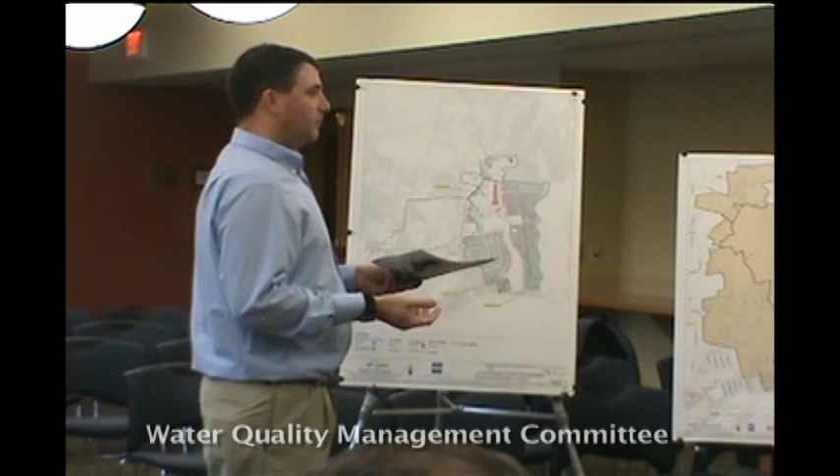How heavy are they? Well, the pumps themselves, it depends on the size of the pump and the size of the motor. So you can have everything from like a 50-pound pump to probably close to 1,000 pounds. Yeah, we're probably looking at something in the 800 to 1,000 pound unit submersible, depending on how big a station it was.

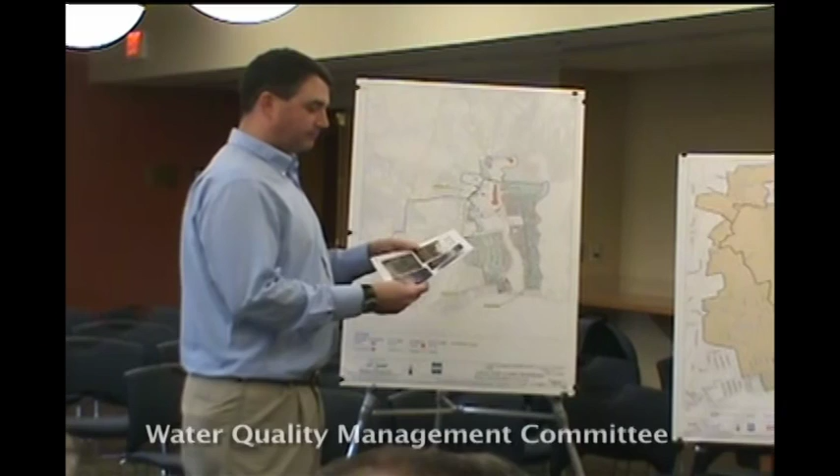Jeff, is it fair to say that the collection radius for all these systems is big enough that you would not have anything like this in the middle of a residential area? Or is that not fair to say? Or does it depend? You mean in terms of the size of the facility, like the station? Well, is there a possibility that there's a big brick house going to be plunked down in the middle of one of the neighborhoods? Oh, no. I don't think so.

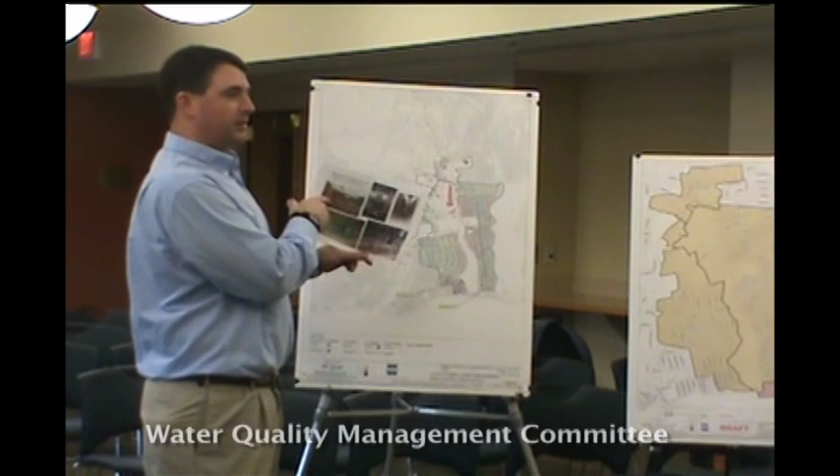What I'm trying to do is give people an example of what these things look like. That's serving something like Jones Palmer, so it's a big station, so it's receiving a lot of flow, and it's kind of like a hub. We're not talking about that. And then Falmouth High School is the picture below, which is the submersible station.

And then for the wet pit, dry pit, to give you an example, in the picture in the middle, the black are the channels of the flow coming in, and then they go into two wet wells, and they have inline grinders there. And then on the other side, you can see the tall pumps in the green, and that's where they're pulling it out of the dry well side.

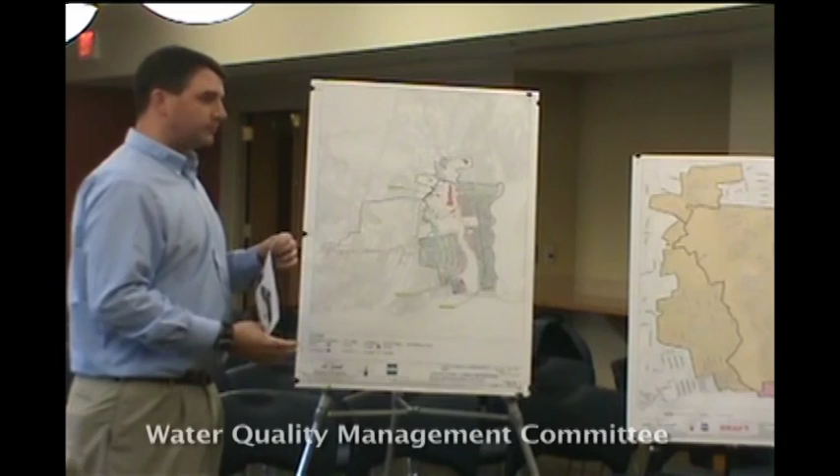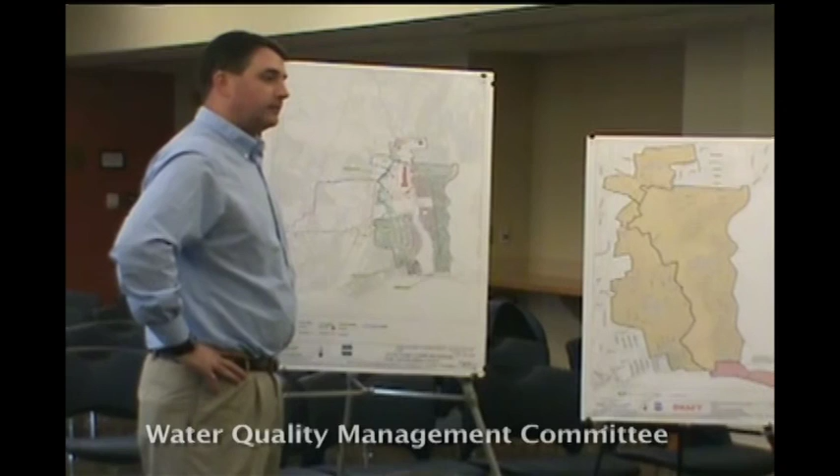Jeff, you can drop it. Just first passage, there was a pump station. How many homes would it be serving, roughly? 200, 400? What I'm doing here is that there's a picture here that you've given of New Silver Beach. And the New Silver Beach pump station is currently serving about 200 homes, just to give a benchmark of what a pump station that serves 200 homes looks like.

If you go to New Silver Beach, this is sitting right in the middle between a couple of homes. And you drive down the street and you say that's a little bit of an odd looking building because the other homes aren't raised up against the zone yet. So there's a building that's raised up a little higher than everything else because it's built to the current flood zone, the velocity zone, one of the issues.

And you kind of go, oh, that's kind of a small building compared to some of the other cottages. Other cottages wouldn't survive, and it's a new building, but it doesn't look entirely out of place. Right. And that gives you a sense of the size of the building for 200 homes. So I was asking roughly, we're in the same general category, maybe a little bit bigger. Yeah, we're not going to put 1,700 on a pump station.

What you would have is, I'll sort of jump ahead. We've looked at a couple different examples. Maybe not to jump ahead there yet, just to let people know that when you get into the 200, 300 home pump station size, New Silver Beach is a good one to be looking at for what it looks like as a structure. Would you agree? Yeah, and even with the suction lift type stations as well, you can build a structure that looks like that.

A small house. It doesn't look like this big thing that looks like a library or whatever, brick, municipal building.

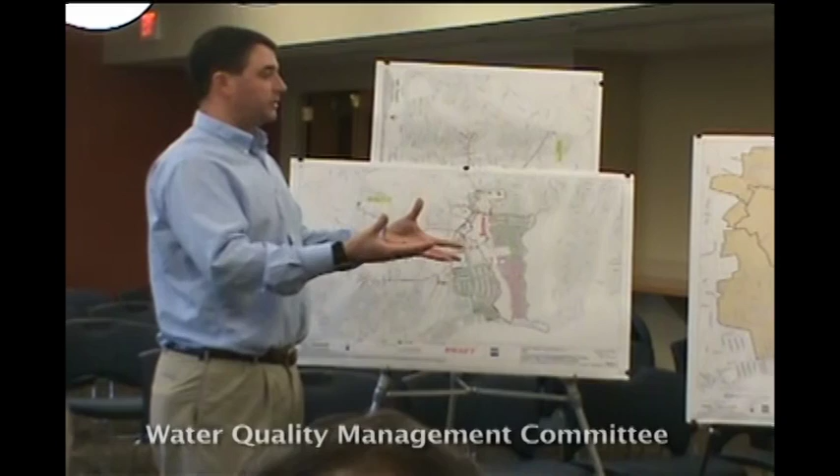That's where you get into the advantages and disadvantages of how you're dealing with your above grade and below grade structures. The advantage of a submersible system is it only has to be as big as the electrical system to house your electrical system. Everything else is below grade, and you never see how big that tank is and how big those pumps are. You could have 500, 600 gallon a minute pumps in a submersible station. You've got to make provisions to be able to get them out of there, but you could do that, and you're not gonna see them.

The only reason the new Silver Beach station is as tall as it is, is because it's in a 100-year floodplain, so it's up on stilts. If you're above 14 feet here, you wouldn't have to have that first story there. But look at the Falmouth Beach one, that is also in the 100-year floodplain. It's all below grade, with a generator in it, with a cap that seals off, and vent pipes that run up a telephone pole above the elevation, but it's more money to build that type of station.

Okay, so you can do it either way. Make sure they don't have any questions.

Thank you for coming. Oh, you're welcome. Any questions or anything we could help you with? No, I found out what I wanted to know. I hate to rush, but we've got an 11 o'clock appointment. It was fair, very informative, nice that you came. Thank you very much for coming. I'm glad you're part of it. Good, nice people. Thank you all very much. We appreciate it. You're welcome. Take care. Thanks.

Let's get into the business of the area and how you came up with what has to be done there. Move this one there first, just so everyone can see that.

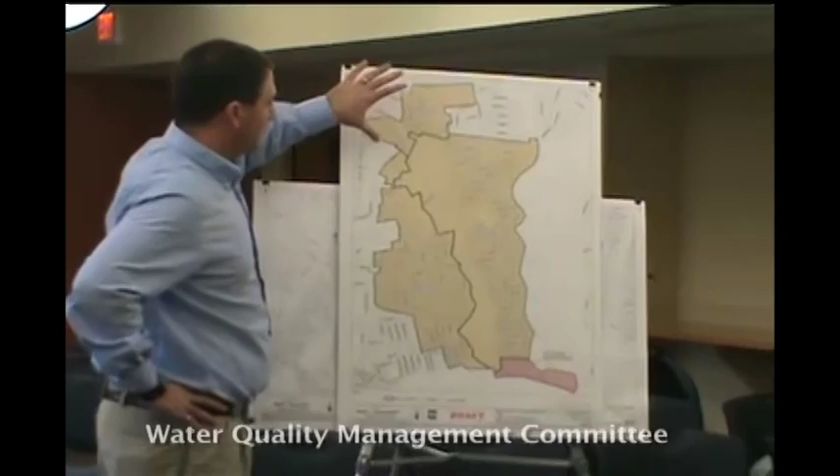Little Pond is the rebuild spot, and this is addressing that rebuild spot. So, just for the purposes of what we at GHD have been doing, we wanted to break some pieces out just so it was easier for us as we started looking at layouts. We looked at basically the Maravista Peninsula as one item, the area up by the elementary school in the northern part of Teaticket as another area, and then this area down here, Falmouth Heights and the Worcester Court area, as a separate area.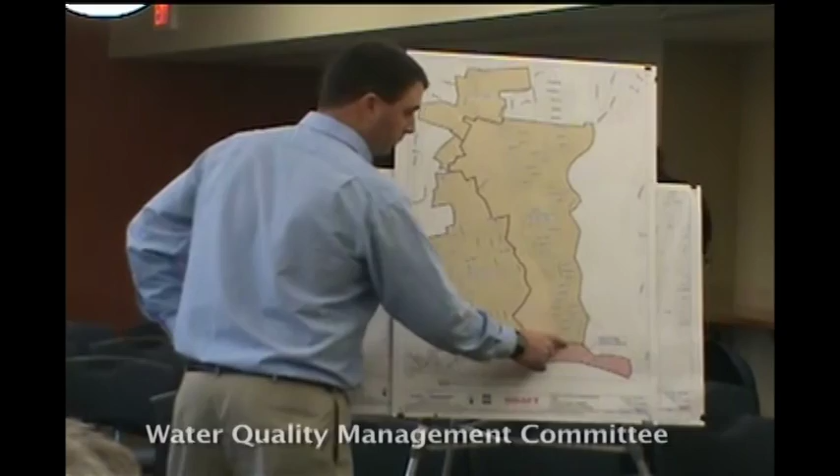We've also identified the fact that although it wasn't in the original layout we were talking about as part of facilities planning, in all reality, anything that happens here with regards to a collection system needs to make provisions for what might happen down here. So in terms of sizing, it's not part of our task to do a 30% preliminary design and identify these evaluations of the various technologies, but we need to be cognizant of this.

We also need to be cognizant of the fact that Falmouth Heights sits out there, and in terms of provisions, we need to make sure we know how that might fit into the bigger picture if anything ever had to happen here. But that is not our task. We're not doing any layouts in this area, we just need to be cognizant of the fact that it exists. That's the reality of all this work, especially when you have areas isolated from the rest of town, that you'd want to make considerations for.

So this is the general area we're looking at, and what we're doing is going through the process of doing some layouts of different types of collection systems to see how we might address these various different areas.

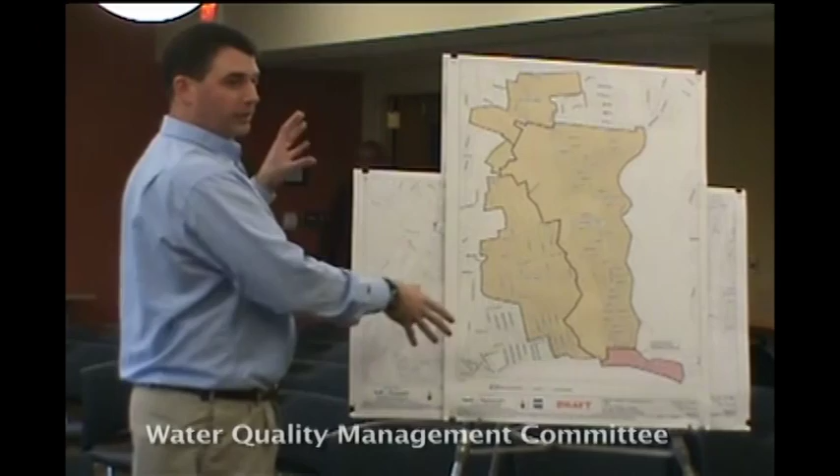Right now, we've only gotten as far as dealing with the gravity and low pressure, and then the all low pressure type system. The gravity and low pressure can be either the STEP and STEG type system, gravity and grinder pumps, gravity and step pumps, or all low pressure, which is just anything where everyone's on a pump system.

So what we started to do is look at where we were going to try to put a pumping station. And so that's the biggest question. So when we started the project...

As part of the facilities plan, I believe, there were some areas identified as potential locations. We were looking to try to site a pumping station somewhere down in the southern part of Maravista, somewhere either north of the mall or along the mall area or adjacent properties, and then somewhere down in the Worcester Court area.

What we determined at this point is buying property, and there are no real vacant lots down here. So the potential for a pumping station kind of fell off the wayside.

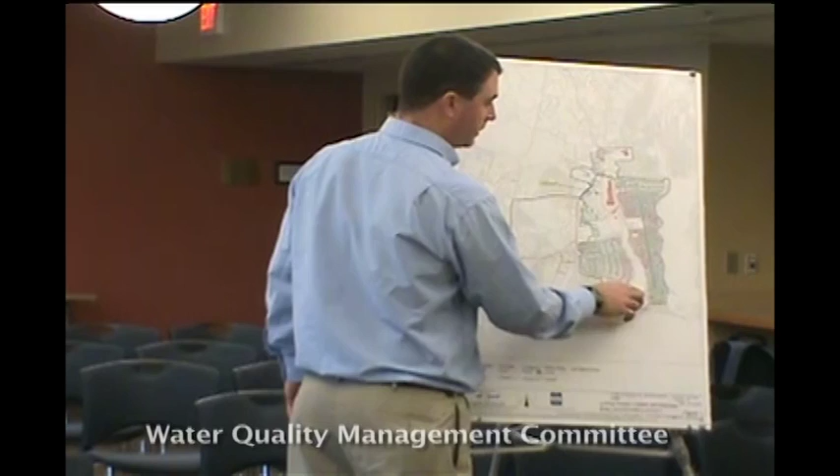So that left us with here, and as we were looking at these locations, we determined that probably negotiating something with the mall would probably be the most favorable.

So where that put us is potentially putting a pumping station down here in the Worcester Court area and one up at the mall area.

What happened though is we had initially dealt with the school coming into this system and going to a station over here. We're now looking at the possibility that if you put a pumping station on town-owned property up near the school, or the other town-owned property in this general area, could you get gravity flow going the other way?

Again, this is just us working through the process. This is not, as Eric said before, we haven't defined all the boundaries, but we need to have an idea of where these things are so we can hone in on the boundaries.

By putting a pumping station at the mall, we can address some issues that the mall already has. And then with the gravity low pressure system, anything in green we're outlining would be potentially gravity sewer.

And then all these little extensions would be areas that would be low pressure, and then all of this would be low pressure coming up and tying into this. The flow from this area will go to this pumping station.

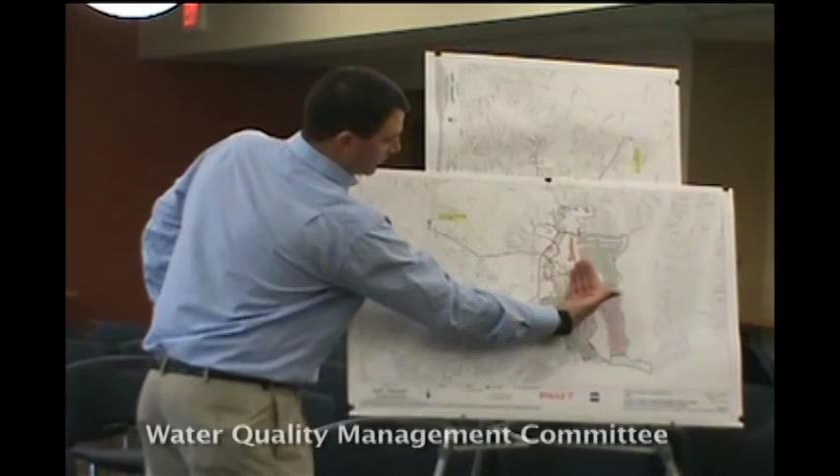So it's a combination, and I won't point out all each areas, but there's potential to come this way and also to come down and then pump back up. And that flow all ends up at...

Inner Harbor, the existing pumping station, which I can't remember if I had a picture of it or not.

Yes, you did. And as Eric had talked about before, as part of the previous facilities plan back in the 80s, they had looked at taking it from—and I apologize, I don't remember the exact boundaries, but I believe it was a chunk of this and a middle section of this.

So the flow regime was different, but the idea was those areas were going to eventually end up coming to here and then work their way up to the Jones Pond pumping station.

So we then look at, from our pumping station at the mall, and again, the shortest route would be to come Jones Road and over to the Jones Pond pumping station, but you're also dealing with a major road and the issues with that.

On the low pressure side, I just want one conversation around where pump stations may or may not be able to go.

Okay, I don't know how far you've gone into this, but how did you ascertain what sites might be available for pump stations?

And where I'm going with this is, there are a couple of empty lots in that area. But if we're going to cover it, we need to rule out why we didn't consider any of them. At least there's one I know that's for sale in the peninsula. In town, there's not many, but I know of at least one empty lot for sale.

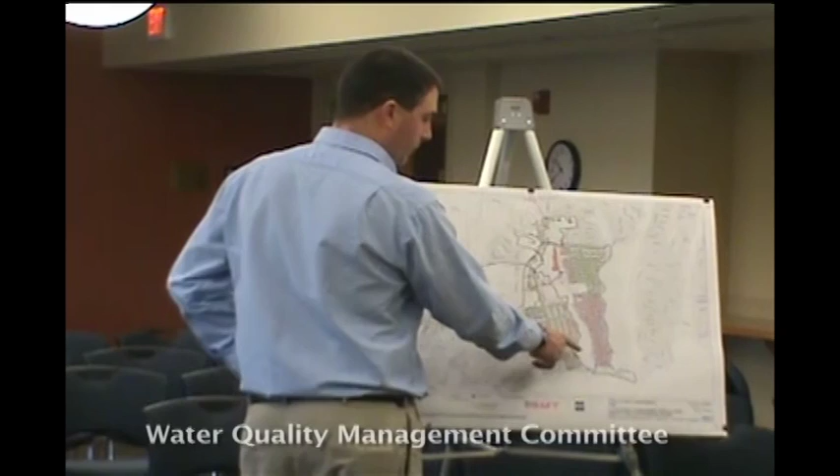Yes, and we're doing it again. So we're in the middle of the process. What we've done is, as part of the first round of the facilities plan, we identified a property down here that we thought had potential. We actually drove out there this year, and it's all fenced in, and you can tell it's obviously part of somebody else's home.

There is another property in that general area that was a house for sale, but I believe it's actually, it looks like it's 3 lots, but it's one larger lot. It's all one lot, and the house is for sale. I know, I'm trying to, I mean, this is hopefully what we...

There is an analysis that we need to get to, going out there—pumping versus gravity, everything else. If there was a piece of property for sale, maybe even a piece of property with a home on it, but it was in an optimum location, would it be economically viable?

Would it save us money on the overall project cost to buy a particular piece of property in a particular area? You're doing this system now, and the system is being driven by where you think you can put a pump station. But if you could put a pump station where you would like to put it as an engineer, would it reduce enough of the overall cost that we should consider buying a lot? I'm not offering eminent domain here, just if it was available.

Yes, good point. And as part of the process, we have to go through and focus on where we think is a reasonable approach, and then do some kind of less detailed analysis to say, does that meet the criteria—is that now a viable spot, wherever it is down there, to go and purchase?

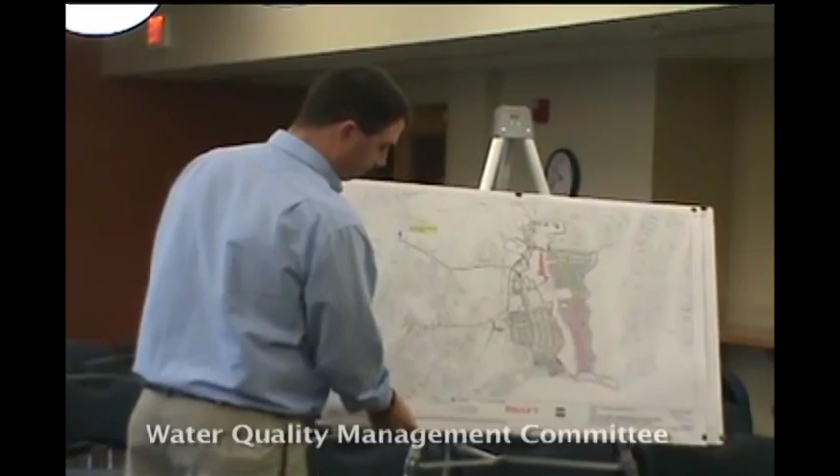When we met with the Board of Health—Dave Carignan—he basically indicated, well, you looked at the paper roads and road layouts on either side, as well, and we haven't at this point. I'd have to look at how this is, and not personally knowing how those houses are right now.

You may deal with more issues with people who feel they own waterfront property that they may or may not actually own because it's a road easement or something like that. But they don't know. And again, that comes down to the town and public piece—it may be the least costly construction-wise, but you're going to get the biggest fight in the court of public opinion that you'll spend more money doing that. I'm not saying that is the case, I'm just saying that's another thing that's harder to quantify.

There's a few other points. So one is, besides the odor thing that you mentioned, which could be whatever, there's also noise, which we don't know about, and vibration.

And in this town, there's a lot of sensitivity to infrasound. It may become a factor in all of this?

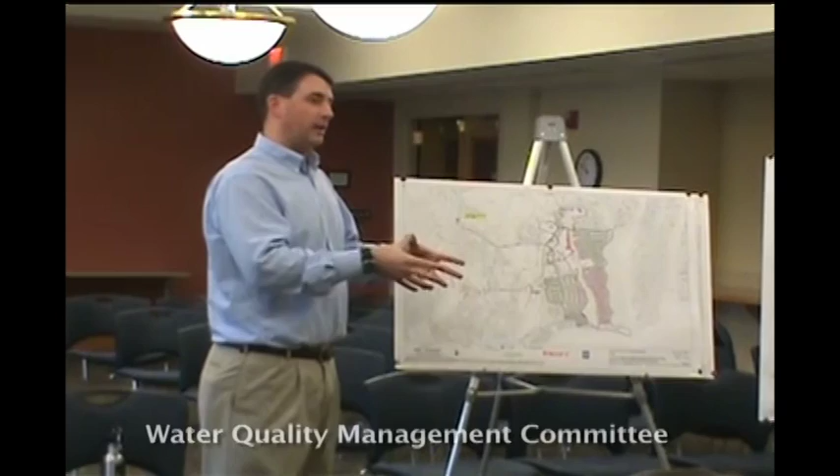We were looking at the 30% design level, the question is, are these questions which go beyond the 30%? Well, what would happen, what the steps are, is you do these layouts first, then you do the cost analysis, and then there's going to be a decision between the town and the committee on what way they want to go, and then we'll do a 30% design layout based on that. That's the steps in the process.

How far does it not go? Are we doing a 30% design on every one of the technologies? We're evaluating all the different options, and then we do a 30% design on the one that's selected.

In that 30% design, are you then going to include questions like the one Steve is raising here? I think we're past that by that point. Did we answer by then? Yeah, at that point, you would be settling in on various station locations. A 30% design is going to give you essentially plan and profile, to give you an idea of how deep the collection system is going to be, what it might look like, what typical details you'd have depending on whether it's a step or a grinder or a gravity type system, and how it would lay out in these different areas and what pumping station it would go to, and there'd be some decisions on the type of pumping station considered for those areas, depending on the location and how you want to design it.

It never precludes the town from saying, okay, we've got a 30% design, and then you get into full design and move forward, and there's an issue that came up between the time you did the 30% design and when you actually go to final design — say National Grid decided to put a 12-inch gas main right down the middle of where you were putting all your sewer, or whatever it is. Those things happen, and then you have to say, okay, we've got some pretty good information here to move forward, but we're going to have to adjust that based on this. Or all of a sudden there's some great location, and the only reason the cost would have been beneficial is they didn't think there was the political will to put a pumping station down there, and now there is — something's changed there. You would have that information from this process that you could move forward with.

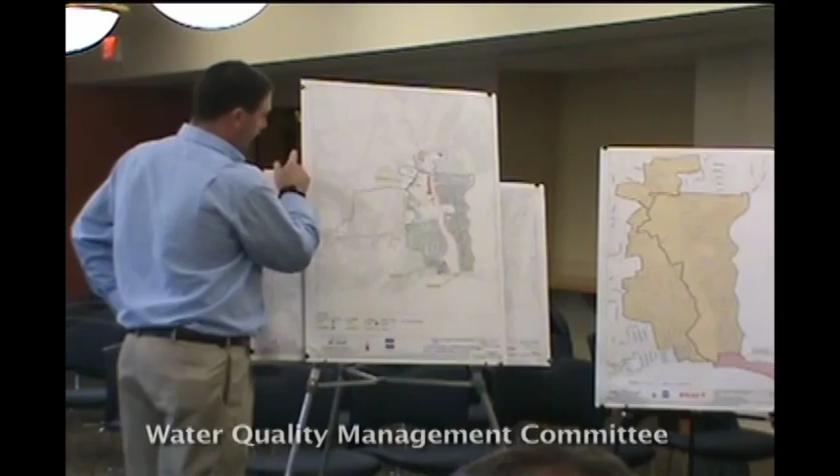On this map. But some of this flow does end up at Shivericks because it comes in and will come to Inner Harbor and then will come down this main and then would end up at Shivericks Pond. So that's why we sort of broke out this piece from this and this.

Because this peninsula, the Maravista Peninsula and this area by the school would come over here, and then this area down here would either tie into the existing system, either by gravity or low pressure directly, or end up at a pumping station, which then pumps up into the system, which ends up at Inner Harbor. And then Inner Harbor pumps up into the main on Main Street.

But is it, I'm sorry, is it just too much to all go into the one connection then? Where? Well, you're saying one section would go down Brick Kiln Road, and the other section would connect to the existing pipe? Yeah, there is a concern. As part of this project, we're also looking at capacity analysis. Now, this was originally designed to deal with a part of Falmouth Heights and a part of Maravista, and not the same configuration that we have here. I see. So you don't expect to find enough capacity for all of it anyway?

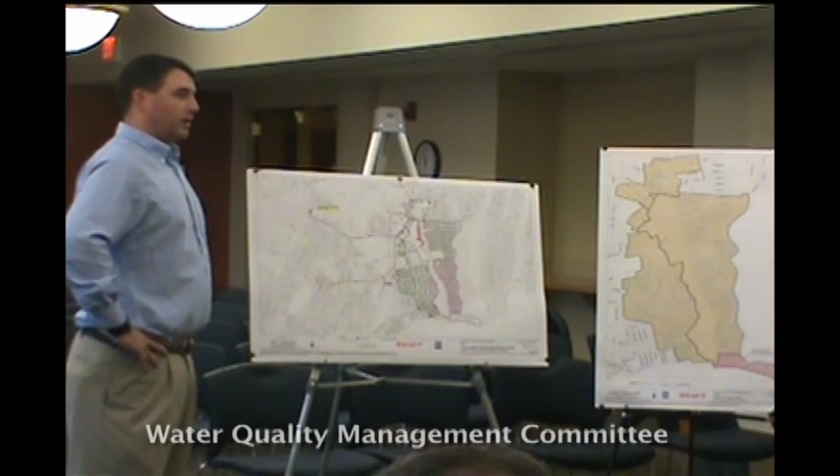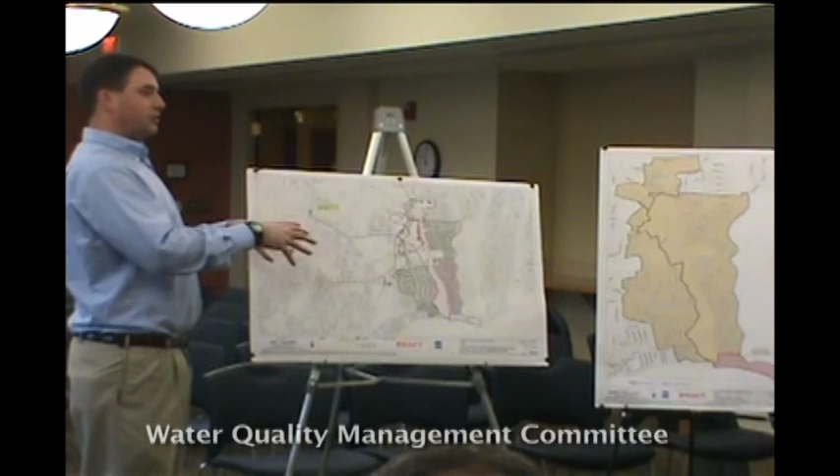Would a school be considered really a high load or a lower load? Schools are difficult wastes to manage, because an elementary school may not have a higher nitrogen load, but it's a higher nitrogen concentration that is more difficult to deal with. So what we found is that schools that are mandated to put in their own treatment plant would typically like to pick up other areas, so that they can get a more balanced flow, they get that summer flow that they wouldn't have, and they'd also get some residential flow to help dilute their waste a bit.

But for what we're doing here, Jeff, which will be gathering from these properties up to the main treatment plant, the dilution factor should not be an issue. No. We're trying to size the system only for a school at the location of the school. Yeah, and this is just a pumping station, because it's not treating anything. But the waste itself from a school, if it had to be dealt with by itself and you were trying to manage nitrogen, it's a lot more difficult.

So you want to bring in other flows, residential flows. No, I know, but I'm just saying that would be why you would want to do that, to answer his question about whether it's a more difficult thing. It is a more difficult thing to manage, but here with the collection systems, it's irrelevant, because you're just pumping it into your system and then you're dealing with it. Pumping the flow to the treatment. I'm just curious if it had a unique condition. It's all pee, that's the unique. Well, there's no laundry.

That's right. But the schools are closed during the summer season, and I actually think it's a fairly good fit for this seasonal area. Its flow is in the winter, and the summer flows will increase, but the school will be closed. And once again, we have the example of New Silver Beach, which has the North Falmouth Elementary School tied on to that same system. They utilize the school during the winter when the flows are so low out of the neighborhood. It balances out a little bit. There's a little bit of trick in the June time period when it ramps up.

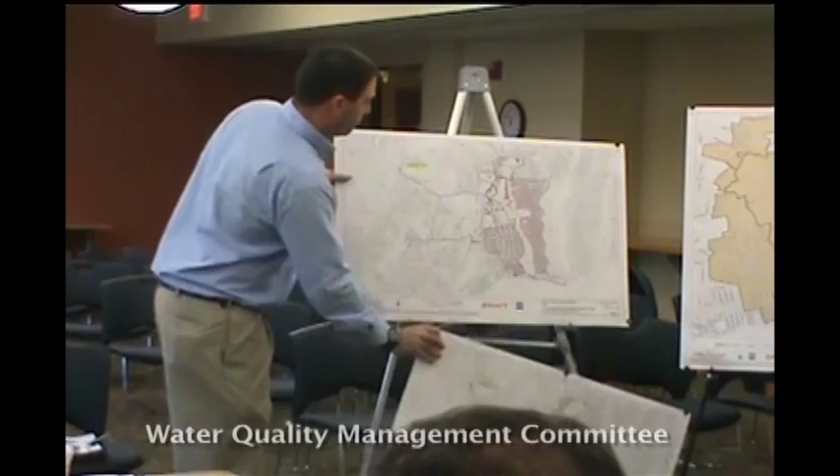With a low pressure system, it's really just, at that point, where you wanted to draw your line. You wanted to draw it there, you want to draw it there. You can slice and piece if you truly wanted to do that. So in that case, for example, the side that drains into Great Pond rather than Little Pond, you could plan to leave those undone or done in some other way.

You could. My caution is that it's great to look at a watershed line, but that's all it is. It's a line. And in reality, are you going to stake your life on where exactly that line is? That it's exactly on this guy's house, and if you pick him up, you're definitely getting it out of here and not out of there, or vice versa. I mean, this is all for planning, and you'd spend gazillions of dollars trying to map exactly where every single person went.

So that's why, when you start talking collection systems for a cluster system or for a treatment plant or for tying into an existing system, the lines cease to follow watershed lines and begin to follow what makes sense with regards to topography and neighborhoods. Because the first thing that's going to happen is you put in a sewer and you stop it right there, and the guy next door goes, yeah, I wanted sewer, why just stop there? Why didn't you go another 10 feet in front of my house so I could connect? There may be the other person that says, whoa, I want you to stop.

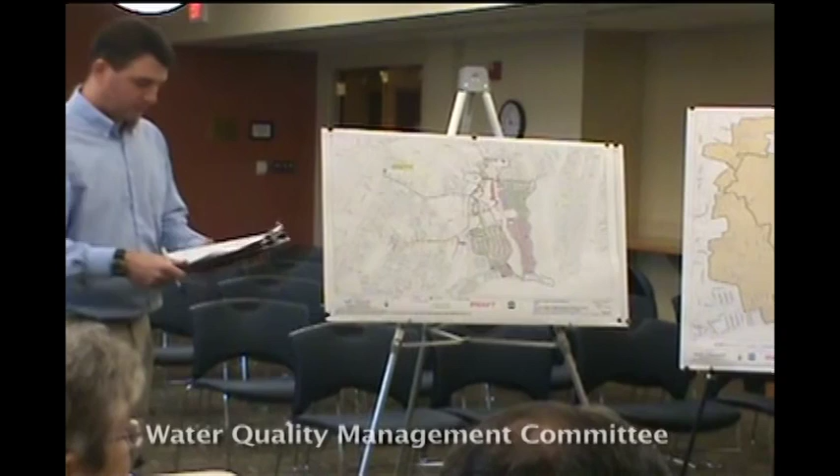If you're thinking about a gravity system, you now have to rework the plumbing in the entire house to get it to go out the front to the street. So that may be a really important cost differential to the low pressure pump.

I would like to thank this committee for all the work you've done. This has been very informative. I live just opposite Teaticket School, so I'm just north of the boundary line there. I lived through sewering in two places, gravity, and again experienced this septic system in the rear with the piping through the house in Braintree and Westwood. So I think the work you're doing is very fine. This has been very informative about the new technology, the pumping and all that business.

And your name? Joan Power. Joan Power. Okay, thank you, Joan.

I have a question. Are you ready to do this again, Virginia? Yes, I am. With Eric's help, he's been a very able leader of the committee, and you can see there are lots of issues, and it takes a lot of time. Virginia and I were there 30 years ago, at the Department of Public Works phase one. And you're going to be here another 30 years. I didn't think I'd see phase two. Well, we have a very capable bunch of people who have been working like dogs for about a year. Absolutely, but we've learned to ask the right questions, or at least we think we have.